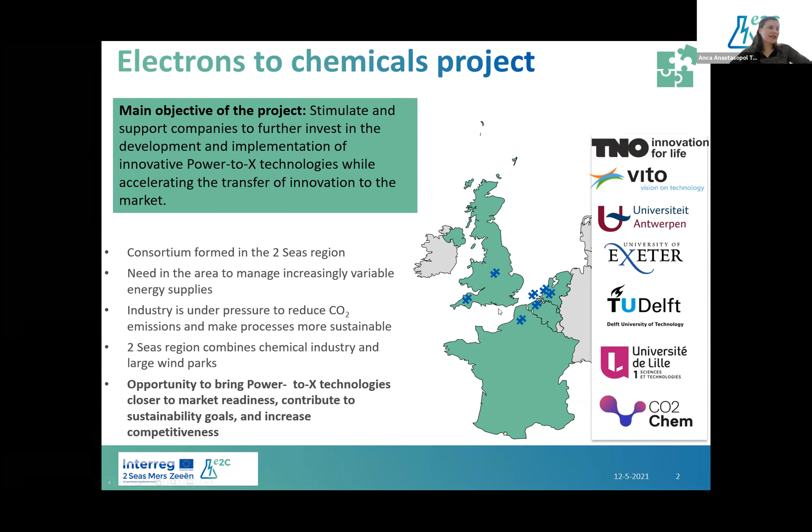Therefore, we have been working in the past few years on developing a lifetime testing station for novel electrolyzer concepts, highly flexible pilot installations for the direct conversion and utilization of carbon dioxide. We also developed flexible pilot installations which will be available after the project for cross-border testing and innovation.

For the synthesis of dimethyl ether via electrolysis and for carbon dioxide electrolysis to formic acid. Moreover, this link to the market is done in the project by looking at feasibility studies for the implementation of the technologies in the 2 Seas region.

And this will also be the focus of today's event. What are the findings from the project on one hand, and on the other hand, how are our guests and key speakers also looking at these issues from outside of the project.

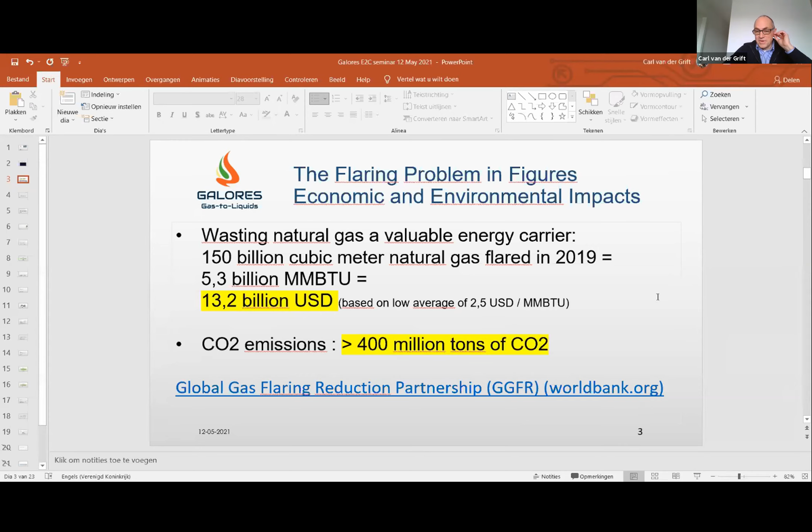And then you wonder, why is nothing being done about that? There are, of course, solutions, sort of. You could capture that carbon at the wellhead, because it comes available in a rather concentrated form. If you captured it and converted it into other products you could bring to market, you could generate additional revenues. Nevertheless, these solutions are not implemented to any significant extent so far.

We see that the barriers for implementation are that flaring, of course, is a known technology. It's well established, it's simple. The operators like it, it's cheap. Operators also consider that any small-scale carbon capture is complex, and they don't see the benefit of that. Furthermore, in some of these countries, they have rather weak environmental regulations and poor enforcement. So these things all contribute to a lack of implementation of any abatement technologies.

However, the times are changing. I think the world is certainly aware that we need to do something about CO2 emissions, and this is seen as a major source. The World Bank has started this Global Gas Flaring Reduction Partnership, where national governments sign up and commit to implement stricter legislation and monitor compliance. Oil and gas companies also commit to stop routine flaring by 2030. So the industry is moving away from flaring, but there's been little implementation so far.

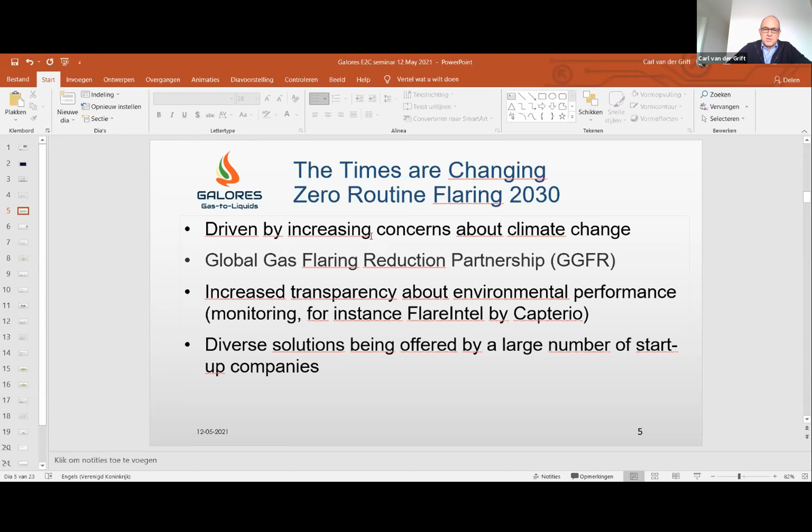So when Chi and I were looking for a challenge a couple of years ago, we decided this was a nice topic to look into, and we started Galores. Chi has a background as a chemical engineer from the University of Ghent in Belgium, and I'm a chemist from the University of Utrecht, and I've always worked in the catalyst business. So far we are just 2 people, but when we have a need for additional work, we will certainly hire additional engineers.

Galores' original idea was to go gas to liquids. In the 2 years we've existed, we've actually thought of 3 solutions we'd like to provide, but today I will mainly talk about gas to liquid. Here you take the flare gas, mainly interested in the methane, and convert the methane into synthetic crude, which can be transported to a refinery via existing oil infrastructure. Realizing that the operator of the well is interested in oil production, we thought we will make a product he's interested in, and we will stop the flare by doing gas to liquids.

Other solutions we look into are blue hydrogen production. Here you would take the flare gas, produce hydrogen via methane reforming and water gas shift, then separate the hydrogen for use as an energy carrier, and the CO2 you would re-inject into the well for enhanced oil recovery. So that is something we're working on.

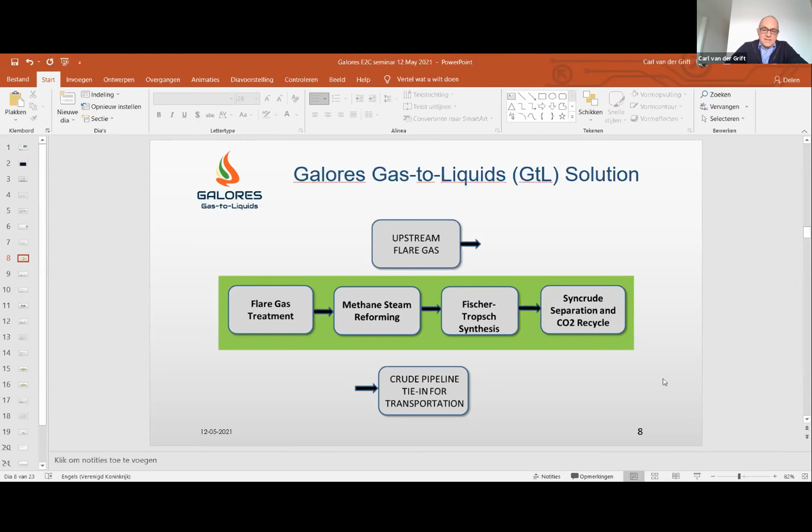Before we look into that, let's look into the chemistry. So here we have the methane reforming. Steam methane reforming is the conventional reforming, let's say, you produce CO plus 3 hydrogen. But recently in development is dry methane reforming, where you use CO2 as the oxidant, and you produce 2 CO plus 2 hydrogen molecules. Now you need to be careful because the catalyst needs some water to avoid coking, and therefore these processes are usually combined as a steam carbon dioxide reforming. More easily we talk about mixed reforming of methane.

The objective of this step is clearly to produce the syngas. Now side reactions are the water gas shift and the reverse water gas shift, as well as carbon deposition by either methane decomposition or the Boudouard reaction. Of course these last 2 reactions are certainly something you want to avoid because it will coke your catalyst and stop your process. So you need to be careful with temperature, pressure, and catalyst selection, and make sure there is enough steam to keep the process progressing.

Now, once you've got the syngas, you go to the Fischer-Tropsch, and there the CO and hydrogen react to usually long-chain hydrocarbons, saturated and unsaturated, plus some water. As you see, for every molecule of CO that you convert, you form one molecule of water. And there can also be some oxygenates being formed.

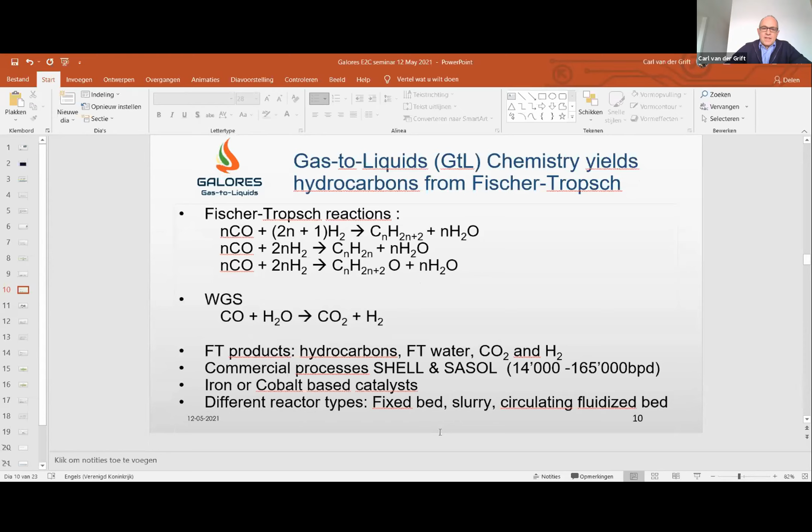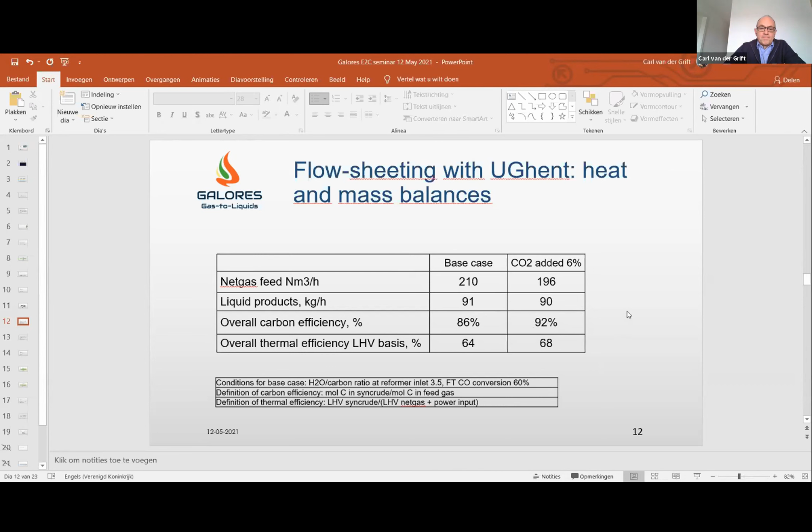So in summary, our technology is based on proven technologies for SMR and Fischer-Tropsch. We can use our own Fischer-Tropsch catalyst, but the process will also work perfectly fine with other Fischer-Tropsch processes. And for the SMR, we are already working with a third party. So the uniqueness is the CO2 recycled to the reformer where it can be reutilized. And we achieve carbon efficiencies in excess of 86%. We produce low sulfur synthetic crude.

And our idea now is to build these modular units off-site for a low fabrication cost, and then to bring them to the flare where they can be started up very easily, and they can be redeployed at other locations once the flare or the oil well is extinguished. We're looking for partners to do the basic engineering, because that still needs to be done, and to build a demo unit. And to make this basic engineering, we're actually looking for funding and launch customers. So that's where we are at the moment.

This is the Galores GTL. Then if we proceed to the challenges that we see, they are mainly economic. Unfortunately, if you do the business case for this gas to liquids, it doesn't really pay.

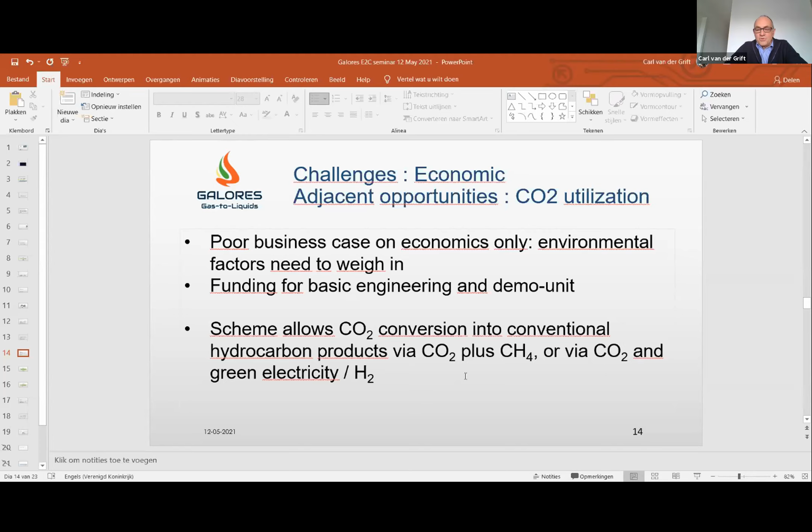The other thing which you can do, which might be more interesting for this audience, of course, is if you take captured CO2, you use green electricity, and you start with carbon monoxide production either through reverse water gas shift or from direct electrolysis of CO2 to CO. And you make hydrogen from the green electricity. Then you can produce syngas, you can send to the Fischer-Tropsch, produce liquid hydrocarbons for a tank, and the CO2 and the water which is formed in the Fischer-Tropsch can be recycled over the process, reusing green electricity to produce syngas, until extinction of the CO2, if that's what you want.

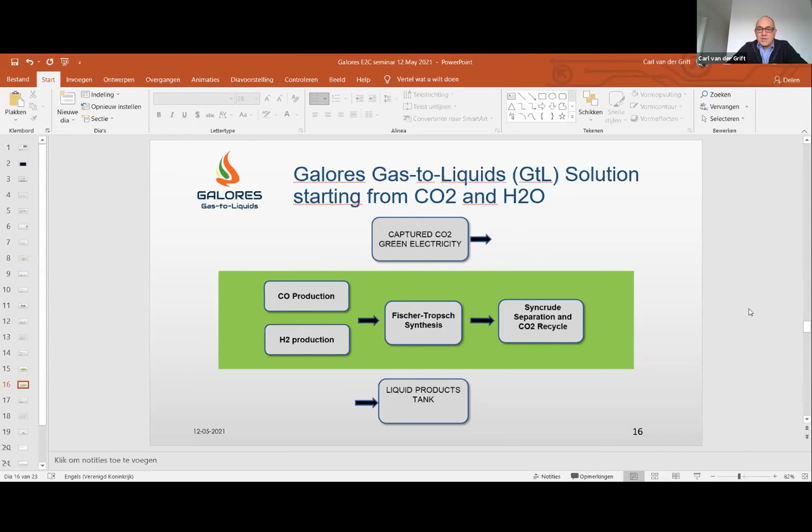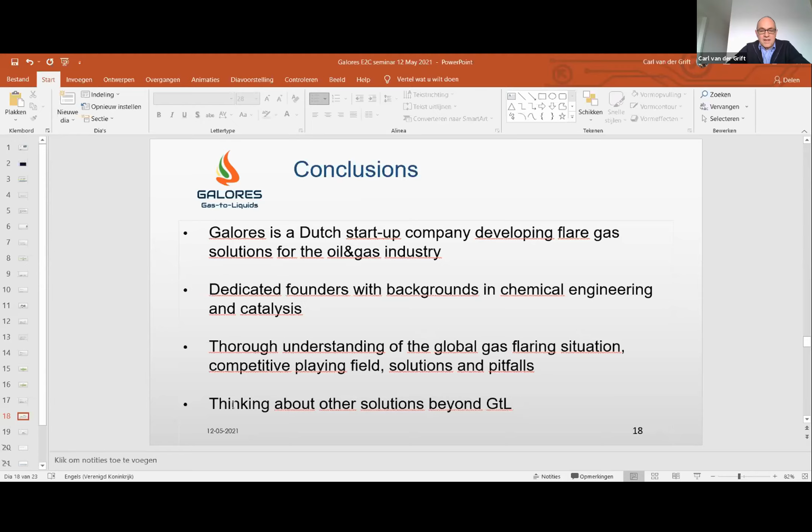So in conclusion, Galores is a Dutch startup company looking at flare gas solutions. We have dedicated founders with backgrounds in chemical engineering and catalysis. We have a good understanding of the global gas flaring situation. We know the competitive playing field and solutions and pitfalls. We have looked at all our competitors, as a matter of fact, and we see what is necessary to have a successful project. And we are thinking about solutions beyond GTL. So with that, I think I come to the final slide.

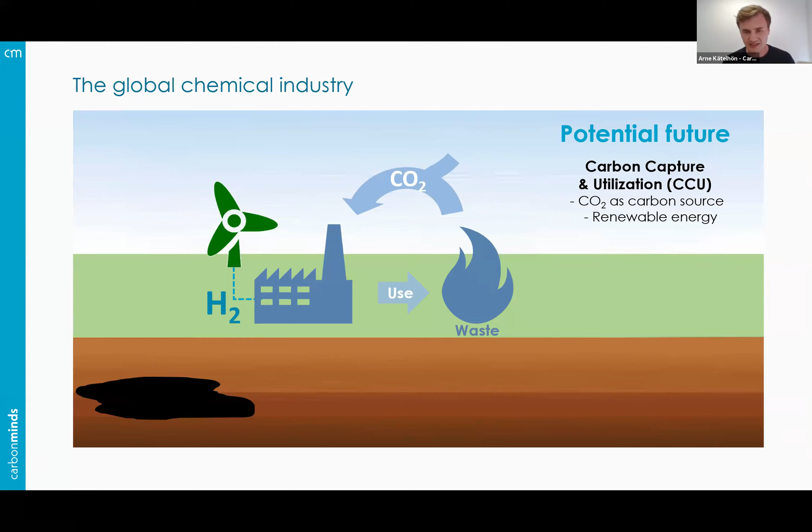For this scenario, we will look into the very concrete details on how this could look in practice. On the one hand, if we need an entire chemical industry which is based on CO2, there's a huge amount of CO2. Where could we get the CO2 from? Secondly, if we get the CO2, how would the chemical industry look if it were based on CO2 and hydrogen? And finally, how much emissions can we save, and what are the energy requirements? And this is also pretty much the agenda of the remaining 15 minutes. So let's start with the first question. Where can we get the CO2 from?

Those are the CO2 sources that we have in Europe, and only the large-scale sources. We have different types of power plants. We have pulp and paper, steel, iron, cement industry, and of course the petrochemical industry. Those are all large-scale CO2 emitters where we could capture CO2. And in addition, of course, there are direct air capture plants, so we could capture the CO2 also directly from air. This means we have quite a choice between our CO2 sources.

So the big question is, where should we get the CO2 from? And I would like to answer this question, first of all, from an environmental perspective. So what would be the most beneficial CO2 source if we want to reduce the climate impact as much as possible? And this brings us to a question: what is the carbon footprint of captured CO2 from the different sources?

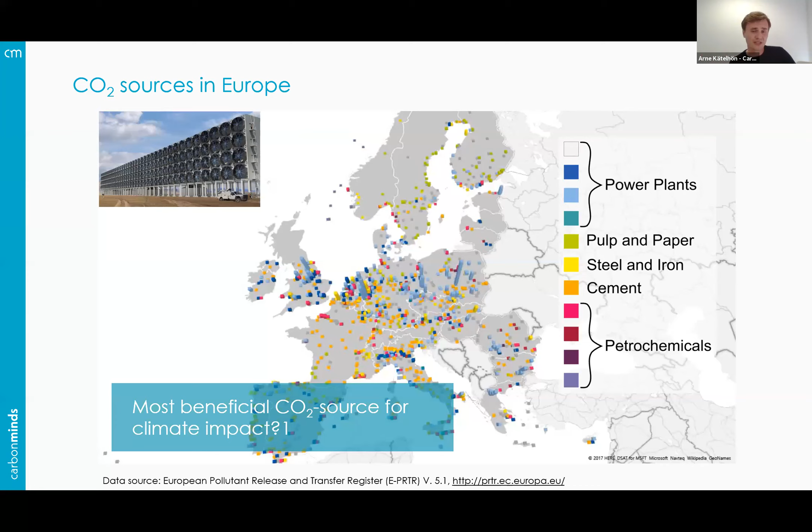And this caused a lot of confusion, I would say, in the CCU sector over the past year. So let's talk about this quickly. And to understand this, let us do a small thought experiment.

Let us imagine we could just draw a line between the natural environment and the man-made environment, so atmosphere versus technosphere. And now imagine I could just magically grab 1 kilogram of CO2 with my hand from the atmosphere, and I could just hold it in my hand. What would be the carbon footprint of this process?

It's quite simple. So if I grab it from the atmosphere, if I hold it in my hand, I've just reduced 1 kilogram of CO2 from the atmosphere. So the carbon footprint of this magic process in this case would be -1 kilogram CO2 per kilogram CO2 captured. And if I released it again to the environment, this would then be 0 over the life cycle.

The problem is we don't have magic processes. In reality, we need technical processes, so direct air capture in this case. And these technical processes, they always use energy and other inputs. And of course, the provision of this energy will again cause emissions, and also the other inputs.

So if we now assume a scenario where we take the electricity from the European grid and heat from natural gas, just as a scenario, it depends a lot on the energy sources, we would generate 0.46 kilogram through the provision of energy for capturing 1 kilogram of CO2. So this reduces the carbon footprint of the captured CO2 in this case to -0.54 kilogram CO2 equivalent that we save by capturing 1 kilogram CO2 and holding it in our hand.

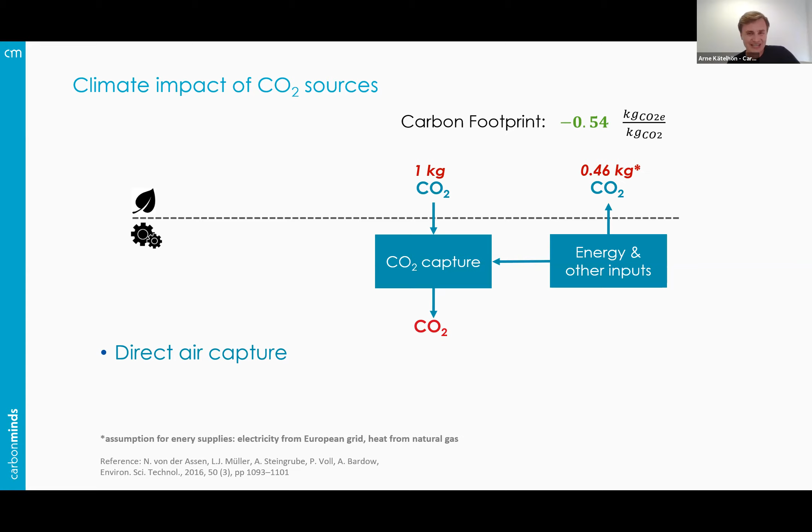But of course, we also have the industrial point sources, and they are already emitting CO2 today. So what we can do here is to go to the exhaust gas and take 1 kilogram of CO2 from there and put it into our CO2 capture plant. So this kilogram will be emitted less. And again, we need energy for capture.

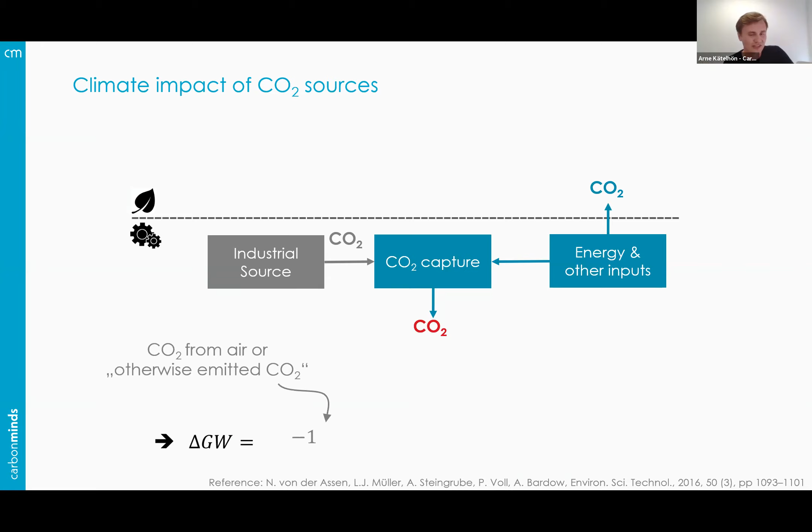So based on this simple thought experiment, we can already give the calculation guideline of how much emissions we save as a consequence of capturing 1 kilogram and holding it in our hand. It would be the -1, that will be emitted less, or that has been taken from the atmosphere. But of course, we need to account for the electricity demand and potentially transportation costs.

If you're interested in this paper, we discussed this in a more methodological, ISO-like language with authors from many different organizations in the EU and US recently. So I can recommend this paper for further details. But for now, let's just apply this to the sources that I just showed you.

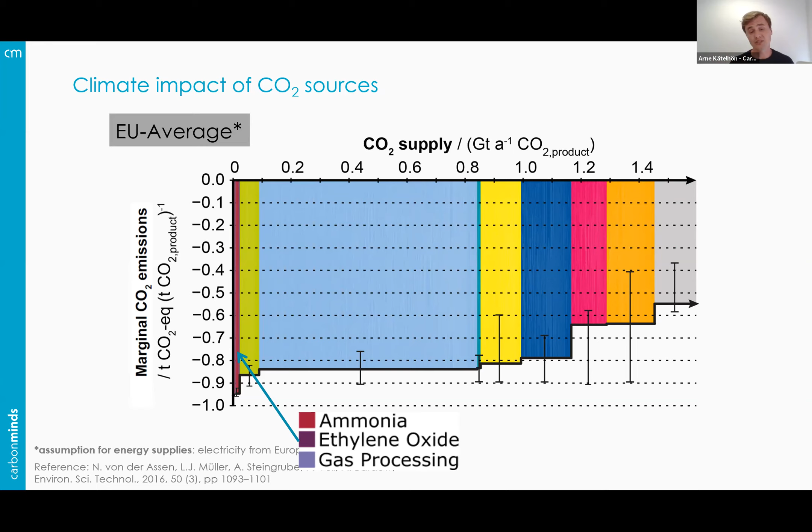We have the highest saving, for example, for ammonia and ethylene oxide, because they produce very highly concentrated CO2 in the exhaust gas. And the thermodynamics lovers among you know that, of course, the energy we need for capture correlates to the concentration. There are some lower concentrated sources: pulp and paper, coal, and also steel and iron, natural gas power plants, refinery and cement.

But of course, in some places, we might not have these large-scale sources available, and also in the future, we want to get rid of them. And this means we can still do direct air capture, which has the advantage that you can build it anywhere, and there doesn't need to be transportation in this case.

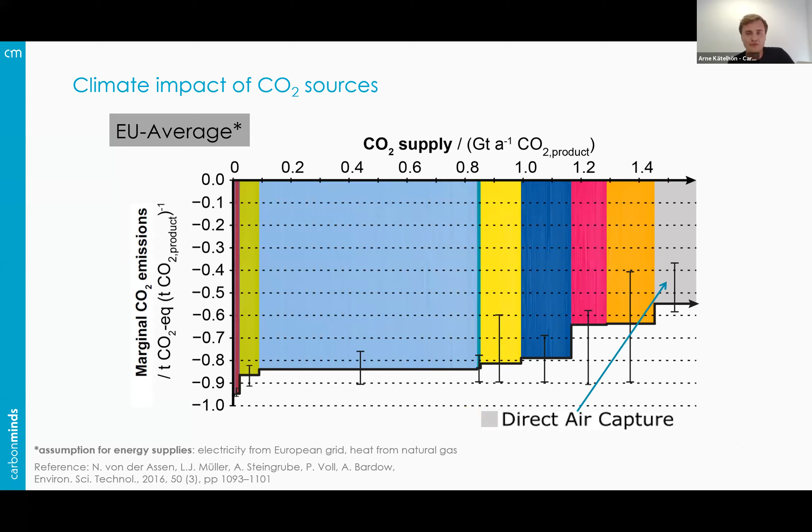What we did here, we calculated for the European average energy mix. If we do this for the country-specific energy mix in the different countries, the picture mixes up a little bit, but of course, qualitatively, we get the same results. So we can say, yeah, we save carbon footprint, and there's a lot of CO2 that we can capture, more than 1.4 gigatons here. Let's compare this to the amount of CO2 that is captured.

At the moment, of course, we don't capture that much, and we have a lot of sources. So right now, we can really choose from the different sources. This will change a bit. In the paper I showed you, we have scenarios for the future where we can still choose a lot, but we can say, yeah, there's definitely a huge choice right now. So why don't we just select the choices that lead to the lowest carbon footprint?

And what we can see, well, by capturing CO2 and having it in our processes, first of all, from cradle to gate, so to say, we have a negative carbon footprint at the point of capture. But does this mean that we just need to produce as many CO2-based products, as much in volume as we can to save the climate? The answer is, of course, no, because it's not only the capture that counts. We need to look into the entire life cycle of CO2-based products.

We put CO2 in from the beginning. And if you look into an ideal case where electricity has zero carbon footprint and so on, we will still burn the products in many, many cases at the end. So all the CO2 gets released. So even in this ideal case, we reach only carbon neutrality, ideally in brackets. And if we want to have carbon negative processes, this is of course also possible, but we need long-term sequestration. This can be done with some mineralization technologies or by carbon capture and storage at the waste incineration plant.

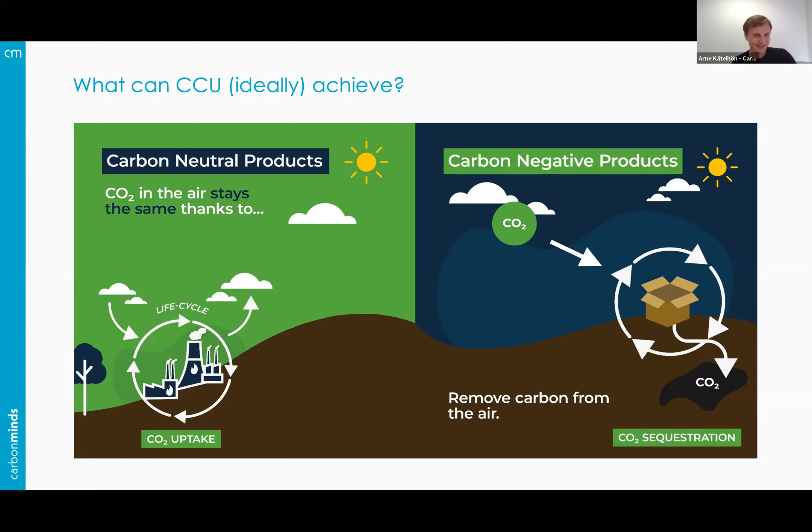So the most common case is not these ideal cases where we have zero carbon electricity. It's more today's case where we have still some carbon in the energy that is used. So in this case, the carbon footprint is not neutral. It's a bit higher than zero, but what we can say, well, in many cases, it's much lower compared to the fossil-based equivalent. So by replacing the current fossil-based processes, this is how we reduce carbon.

So for many, many CCU technologies, it's not that we put the CO2 in the product, because it was burned in the end. The emission reductions, they come from the substitution of something that is more polluting than our new processes. Yeah, and this is important. This is why I put some exclamation marks here.

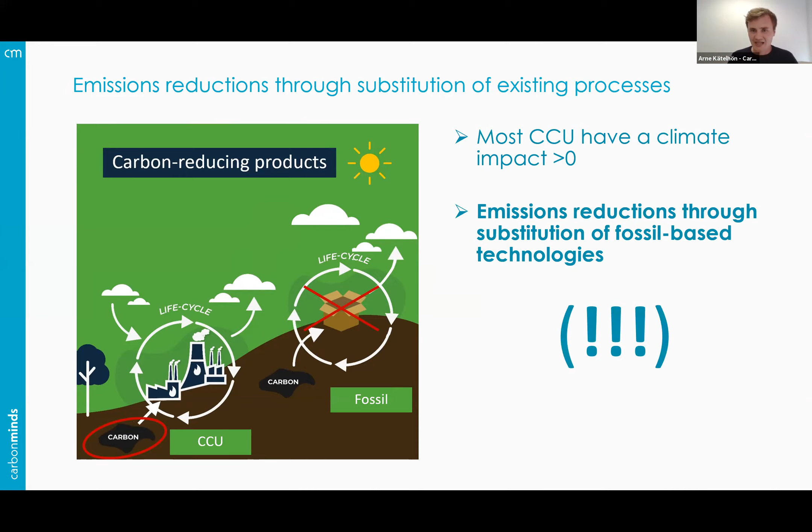So let's look into this potential substitution in the chemical industry. How would the industry look if it were entirely based on CO2 compared to the industry today? Today, the chemical industry is built in a tree-like structure. We have the fossil resources that are converted into feedstocks, which are used for the production of platform chemicals, like olefins, aromatics, which are again the platform for the production of all these thousands of different chemicals that we have today. What is important is it's a super interdependent production network. So plants use co-products from other plants.

We have energy integration. So if we want to analyze the mitigation potential of CO2 utilization, we can't just do LCAs, life cycle assessments, for individual products and sum up the results. No, we won't capture these interdependencies. We need a comprehensive model of the chemical industry that can catch all these interactions. And this is what we built in another study, which I would like to show you here. And we built it for this part of the chemical industry down here, for the production of large volume chemicals. And there's a list of the chemicals that we considered in the upper right corner.

What is interesting about these chemicals is that even though we have thousands of different chemicals produced in the chemical industry, only 20 large volume chemicals, the ones that we see here, account for about 75% of the cradle-to-gate emissions of the global chemical industry. So this is why we chose them as the scope of our assessment, and we compare the best available fossil ways to produce them with the corresponding CCU processes.

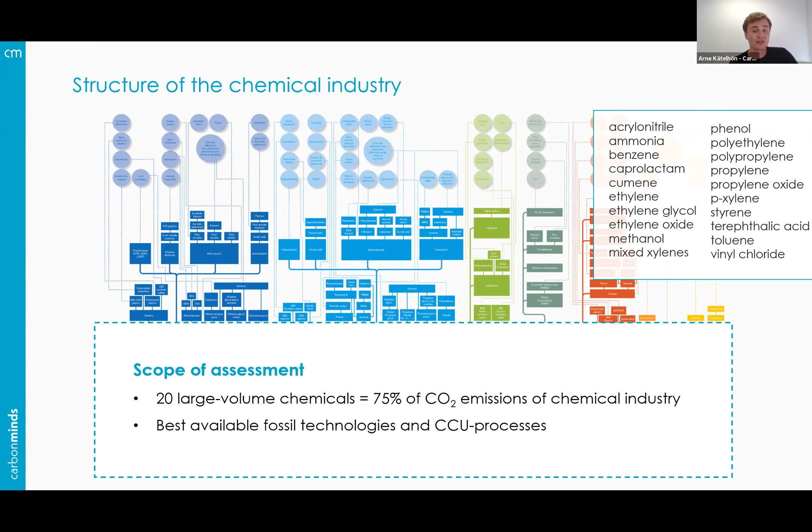We did this by first analyzing all the production pathways, and of course, for the 20 chemicals, we have many more production steps, about 160. In this case, we modeled process flow sheets for every single production step. We extracted mass and energy balances and the direct greenhouse gas emissions. And we used the data to build a full bottom-up model of the chemical industry. So basically a model where we can track physical flows from the oil to the product, in our case those 20 flows, and can also track the emissions.

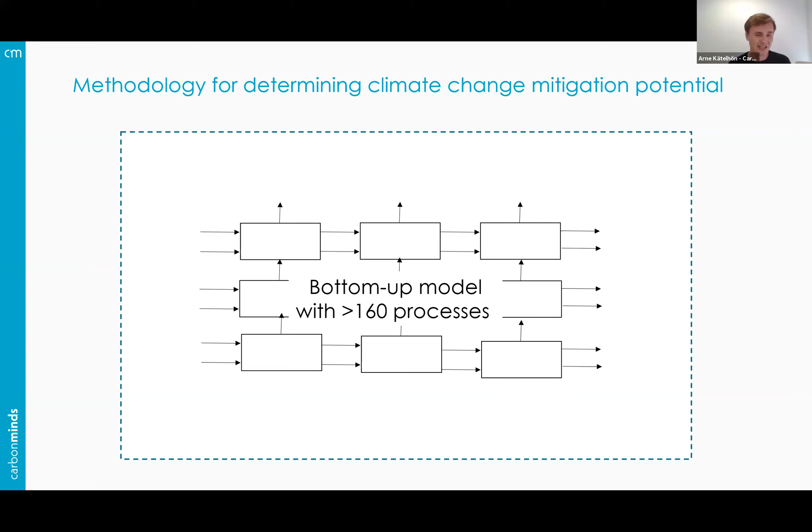The nice thing is, once you have such a model, you can start playing with it. And what we did, we transferred it into an optimization framework where we minimize the greenhouse gas emissions for the provision of the final demand of those 20 basic chemicals for the year 2030. Why minimizing emissions? Well, if we minimize the emissions based on CCU and compare it to the baseline scenario, we calculate the maximum potential of CCU. And this is what we did.

So let's look into the baseline scenario, the conventional scenario, first. So first of all, we put in the final demand in our model. We allowed the model to use only the resources that are already used today.

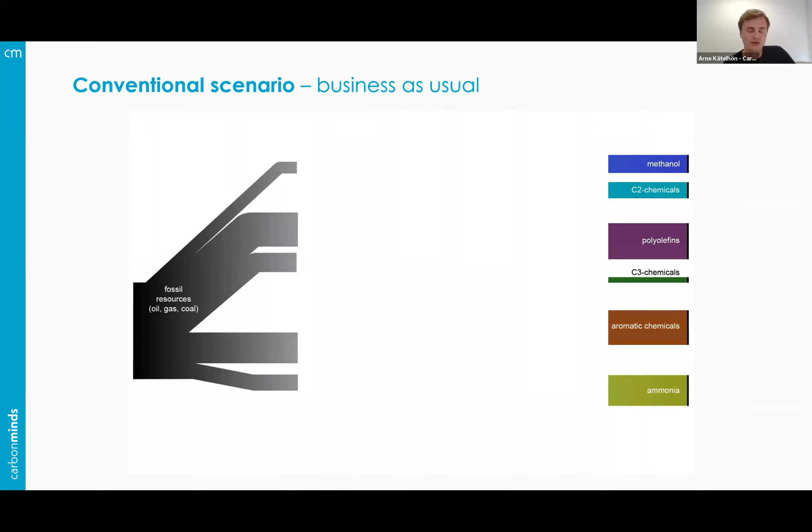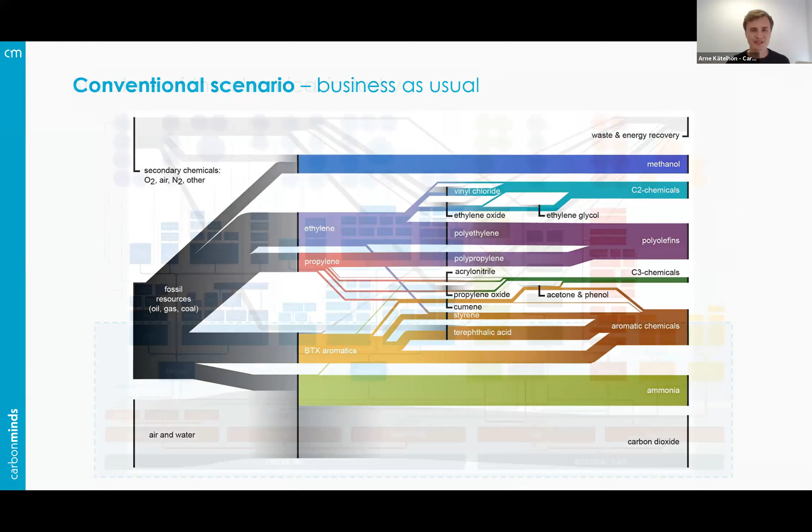We run the model and get, based on this optimization, our structure of the chemical industry. Fossil resources go into platform chemicals, which are the basis of all the other chemicals. What we see here is basically a more detailed representation of this part of the chemical industry.

The emissions are very similar if we compare to different standard studies. This was important because for us, it's of course just the validation step of our model. Now that we know the model works, we can go a step further and also allow the model to use CO2 and hydrogen from water electrolysis as feedstocks.

We do this in two scenarios. First, a high TRL scenario where we only allow CCU technologies that produce one of our 20 large volume chemicals with processes at a very high technology readiness level—in our case, almost mature, with pilot plants available. This was the case for methanol and methane. So we again put the final demand in our model, but this time we allow the model to use CO2 and hydrogen. We implemented the CO2-based production technologies for methanol and methane, and let the model run again.

What we obtained is a completely new structure of the chemical industry—a scenario of how the chemical industry could look if it were entirely based on CO2 and hydrogen. This picture has two messages, a good one and a bad one.

The bad one first: we see a lot of co-production of water for the production of methanol and methane, and also for the methanol-to-olefin processes which we need to get from methanol to the olefins and aromatics. Co-production of water means plant capacities need to get higher, so plants get bigger, more expensive, and it's an indicator of less efficiency.

But we can also see this part of the industry hasn't changed at all compared to the previous scenario, because we use CO2 and hydrogen to get to the olefins and aromatics, the platform chemicals. We know those are already today the platform to produce all the other chemicals. This is why everything in this part stays the same in this scenario, which would be important to keep the infrastructure and reduce investment costs needed.

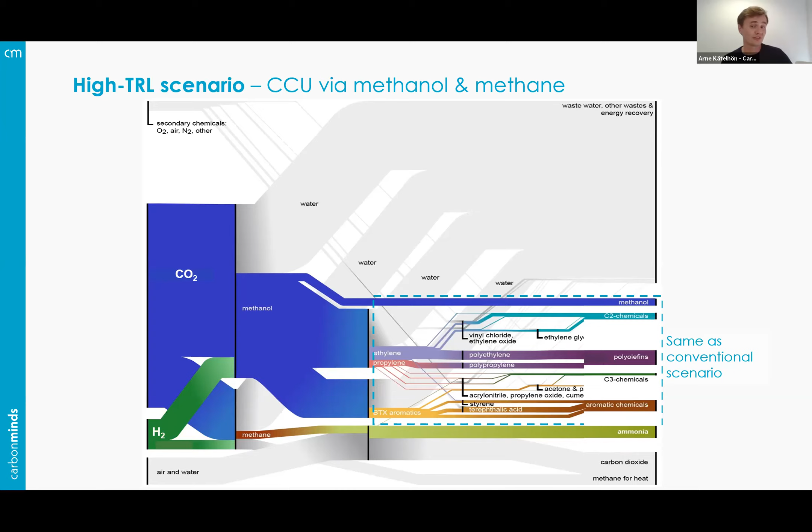But of course, CCU is a new discipline that's gotten a lot of attention over the last decade, and there are many technologies which are not at high TRLs, which are at early research and development stages. For our 20 chemicals, we included some more of those—direct routes from CO2 and hydrogen to ethylene, propylene, BTX, and some other chemicals.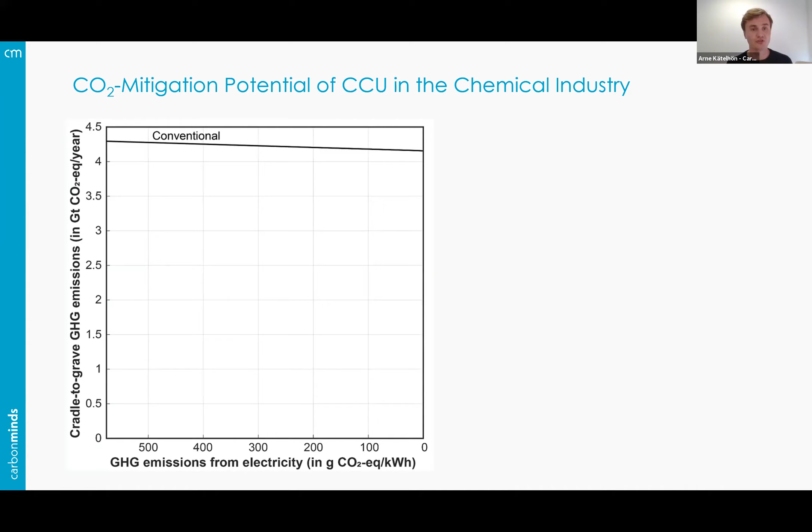This is the result for the conventional scenario: about 4.3 gigatons of CO2-equivalent emissions a year, about half of it through production, a bit higher than today because demand will increase, and the other half due to waste incineration of these chemicals at end of life.

And this is the result for the high TRL scenario. If we compare those, we can see there's a huge climate impact reduction potential—3.4 gigatons per year, getting close to zero for the entire industry. The remaining gap is partly due to, for example, non-CO2 emissions with a higher global warming potential.

If we look into the low TRL scenario, the impact reduction is even slightly higher. You see ranges for each scenario—this is because we have different CO2 sources, so it's the upper and lower range depending on what CO2 source you choose.

What is much more important here is what we can see: if we want to achieve these substantial reductions, we need extremely clean electricity. This electricity needs to be even cleaner compared to some of the very clean grid mixes that we have today, like Austria, Belgium, and Switzerland. You wouldn't have the huge reductions there. We really need renewable energy, like wind and solar PV, and we will need a lot of it.

So this seems to be difficult, at least from a first analysis. So how difficult is it? How much electricity would we need? To understand this, I brought a different graph.

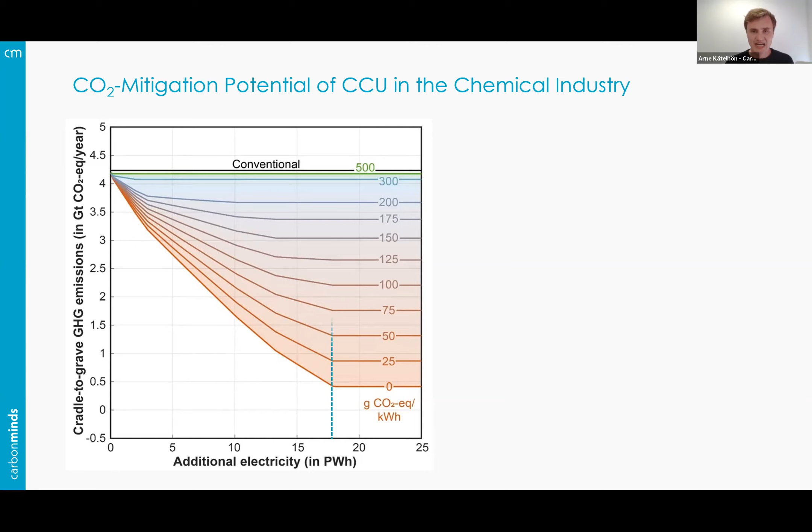To get back to the question, how much electricity would we need? In this scenario, we would need 18.1 petawatt hours. What does it mean? As a comparison, I brought the renewable energy target from the Sustainable Development scenario of the IEA for 2030. We can see this target is for all the sectors together. Only the chemical industry alone would need a bit more electricity than all the others together in this scenario.

I know there are some criticisms that the scenario is very conservative, but I think we can agree those are very huge amounts of renewable electricity. And if we go for only the high TRL scenario, it will be even more.

The good news is, we see there's a difference in slope here in the scenarios, meaning the greenhouse gas reductions per kilowatt hour of renewable energy differ. So if we don't go for the full implementation, we can at least use those technologies which mitigate climate change most efficiently based on the kilowatt hours needed.

But again, if we only go for 10%, 20%, 30% implementation, we're still talking about a very huge amount of electricity needed. So as a society, we need to decide if we want to use our precious and, most importantly, currently limited renewable energy for CCU in the chemical industry, or are there more efficient uses as long as we don't have enough renewable electricity?

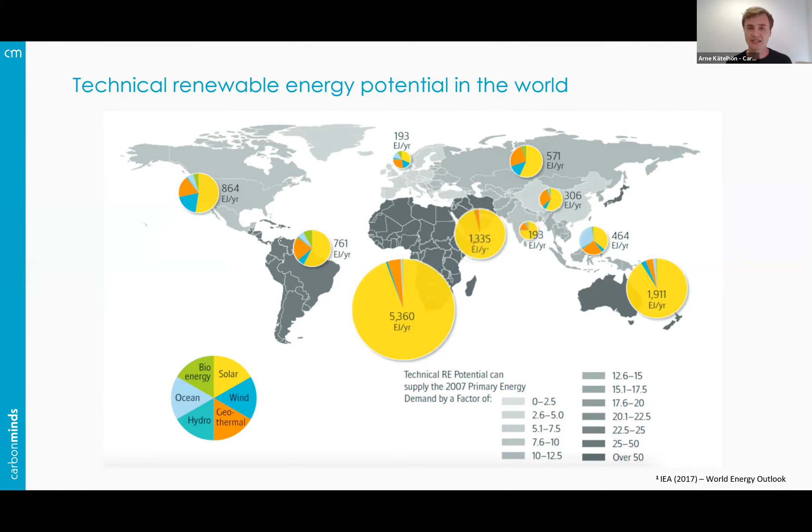So if we can make it possible to use this otherwise unused renewable energy, transform it into CO2-based energy vectors or chemicals, which can be further processed in the current industry locations right now, then we would enable a trade of renewable energy, a global trade via ships, and we could really use the huge potential of CCU in the chemical industry here. We are further investigating this scenario right now, and I believe this is something very interesting to look at.

So in terms of conclusions, we have seen CCU has a huge climate impact reduction potential, but it also requires quite a lot of electricity.

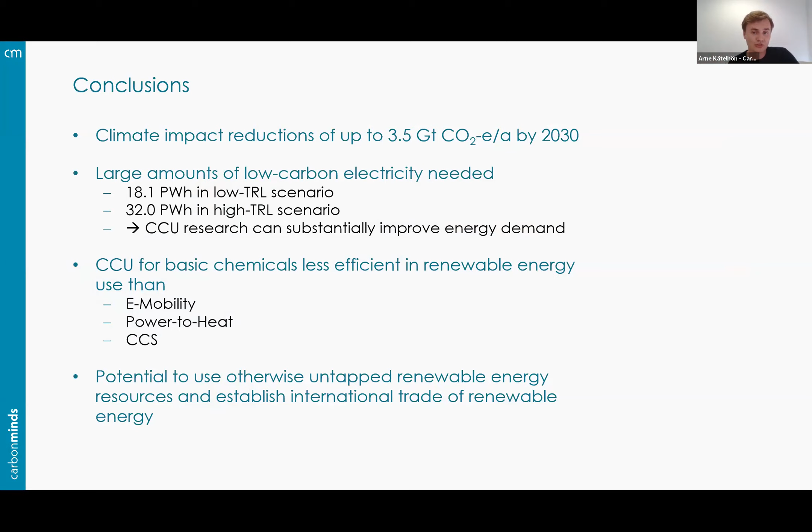When we implement it over the next years, as long as we don't have enough renewable electricity, we need to make sure that we use this renewable electricity most efficiently. CCU is less efficient compared to several power-to-heat and e-mobility applications. So a huge potential would be when these other options are satisfied and where these other options are not available. Here, CCU can really make a huge contribution to climate change mitigation. With this, I would like to thank you for your attention and look forward to the discussion session later.

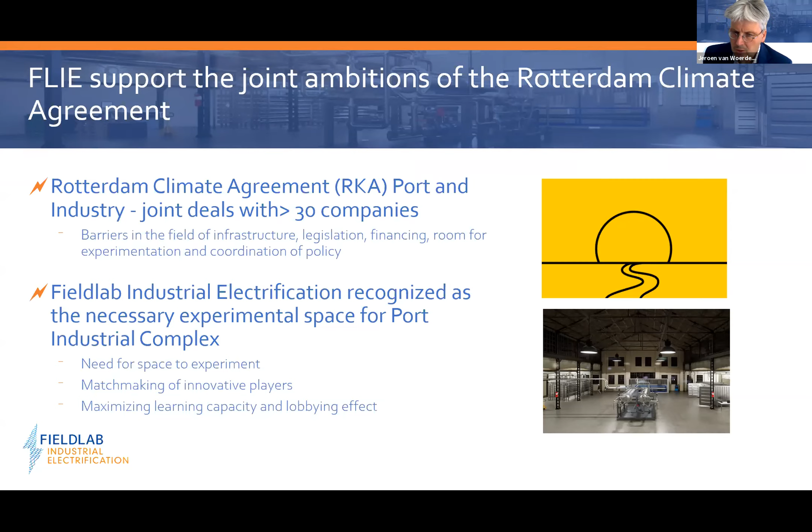With the field lab, we focus on the electrification. And this is our statement that we send around to everybody. We really want to unite players from around the world to bring them together to Rotterdam and to help this energy transition in Rotterdam. And for that reason, the Port of Rotterdam, Innovation Quarter, which is the development company of South Holland, TNO, Deltalinqs, the membership club of the Association of Industrial Companies in Rotterdam, as well as the FME, which is the Association of Manufacturers for High Tech in the Netherlands, supported by the government, European Union and local governments, decided to start this field lab.

And I will tell you in this story what we do with the field lab and how we support the industry, as well as support the technology providers. The key challenge that we have is we have a technology on lab scale with lower TRLs. It's well developed, the ideas are great, but at the same time, the industry is running. There is a very strong demand on this industry in continuation. There is a high pressure on cost control, but there is also a high pressure on safety control and management of change. And it's a huge step to make this step from pilot towards an industrial application while continuing the business.

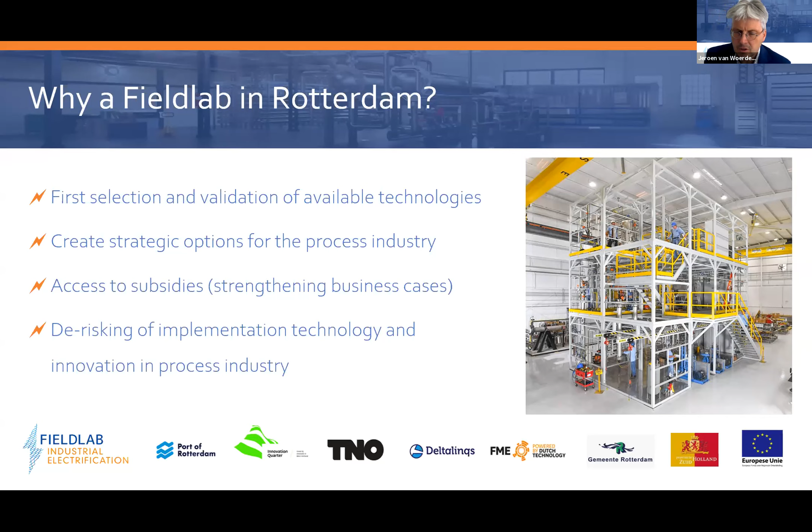And the last one I talked about, the risks. We have to de-risk the implementation of the technology. It's not that the companies are not brave, but there is an extremely limited acceptance from society of accidents in the industry. That means that there is a strict control of the industry, more than any other industry. We see that quite often when suppliers are coming. The suppliers are coming from the make industry, which has its own challenges, but on safety, they step into a new world if they go into the process industry. The process industry has a very strong demand of safety, and that means that everything that we implement has to go through a management of change process. And if it is a new innovation, sometimes that's not an easy step. And that's the reason why we also want to support those companies.

And this is what we really want to facilitate. On one hand, we have the equipment industry offering all kinds of solutions, new ideas, offering the different options. And there we have startups, small companies, and established technology firms. And we need all three of them. The new entrants offer very innovative solutions, but at the same time, not proven.

Established firms have a strong relation with the process industry, but at the same time, they also have to renew their business model. And at the same time, the process industry is the end user of the technology. The efficiency of the assets is extremely efficient, and in the process industry, price pressure from the market is huge. And it's the backbone of Rotterdam.

But there's another aspect which is important. I already talked about money and the financials, but regulations is also a very important thing. As we said, the process industry is a very heavily regulated industry. That means that regulations are in most cases built on history, and if you implement new technology, sometimes it really conflicts with existing regulations. I will give a few examples.

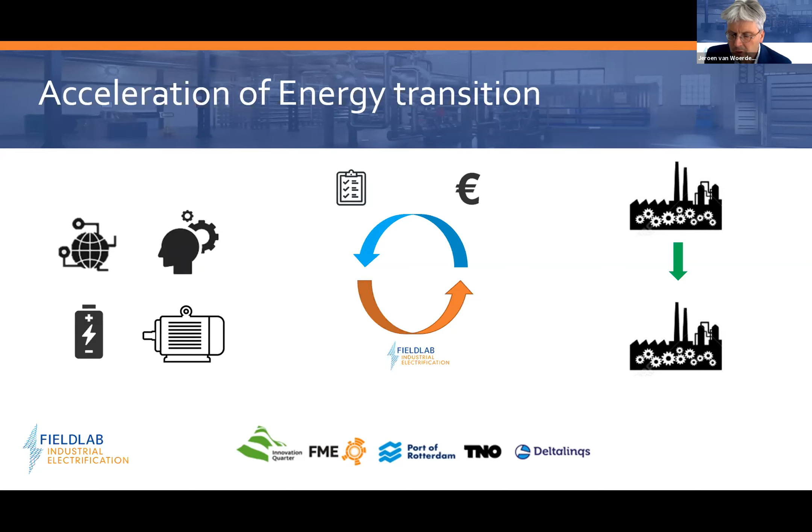TNO is very strong in developing technologies, and Deltalinqs, they represent the owners of the assets. And with that, we actually combined all the groups in this joint field lab that we set up.

In options, there are multiple options that we support at this moment. Based on the developments with green electrons, as I said, a lot of activities at this moment on the North Sea in supply of sustainable electricity. At the same time, also a huge shift going on in feedstock, and a lot of solutions coming up, not yet implemented, but in the next coming years, this will change dramatically fast with green molecules.

And we work together with the industry on the integration of those equipments. And with that, we have solutions for power to chemical, power to heat, and depending on the challenge that the industry has, we are working now on projects with them and try to speed up and accelerate their projects. How do we do that?

The field lab actually has three functions we are building, and the first one opened last January. We have a solution center where we give advice, and I will tell a little bit more in a minute, and we support the companies. And actually it's an administrative center where especially the know-how part and the financing part is a very important backbone.

At this moment, we are building one of the most important steps of the field lab. We are creating a pilot and test location. In this test location, and that could be one or two locations in Rotterdam, depending on the applications that we're gonna develop, we want to facilitate tests, experiments, and pilot projects in the TRL level 4 to 6.

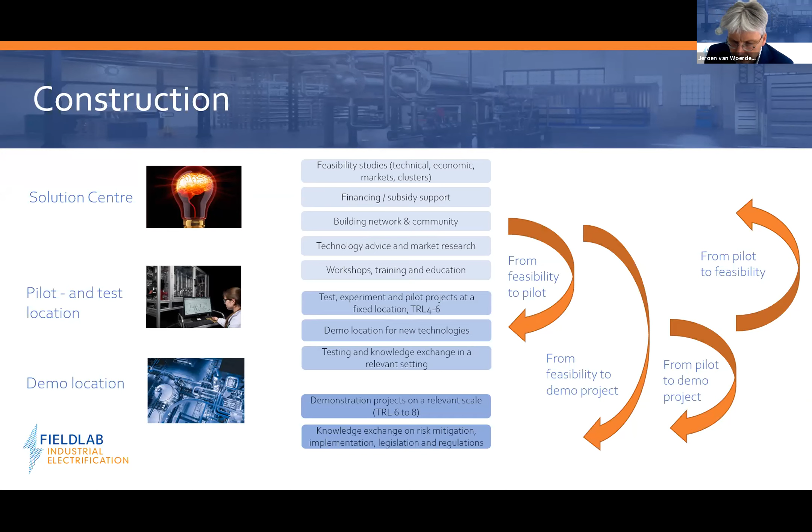The Solution Center has already started. That is now in the middle of Rotterdam. On a very nice location in the harbor, we have started a Solution Center close to the education institutes. And in the Solution Center, companies and suppliers of technologies can get support in know-how. We help them with feasibility studies. We do business case developments with them. And also the governments are asking feedback from us from studies, what they have to change to improve the conditions for this whole transition.

Especially together with TNO and FME, we also drive our innovation plans here, and we facilitate the cooperation with other technology institutes, and also here the exchange of information, but also building test cases for the future. And the next step that we will do is foster the collaboration between the companies, so that companies can quickly exchange know-how and learning aspects, and that they can get support for further research.

Timing-wise, as I said, the field lab started in the Solution Center at the beginning of this year. That was also the moment that the quartermaster phase was at the end. The central hub, we hope to open and announce in the second part of this year. And when I say hope, it is because we are extremely hardworking at this moment to make it possible. So the expectation is that it is at the end of 2021, but everybody knows that in the current COVID times, we have a lot of uncertainties to manage. So in one year's time from now, you can visit the central hub location. And the field lab demonstrations, we expect to have them from '23 onwards.

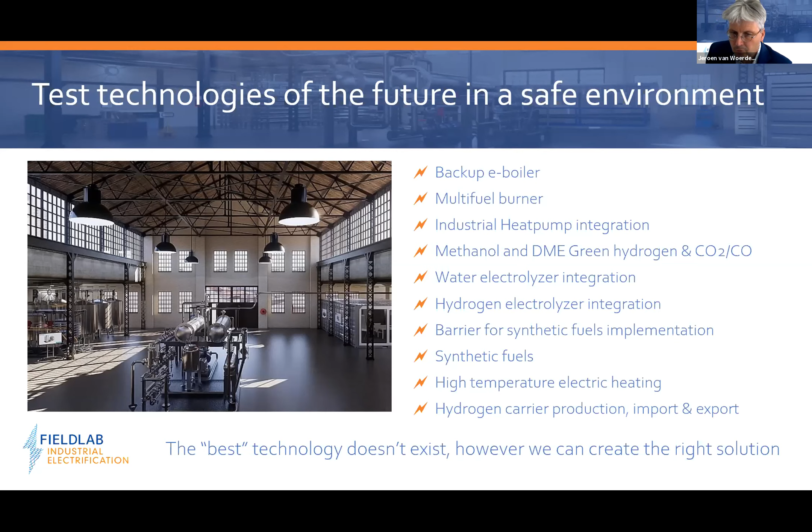Industrial heat pump integration. Now you can read all the examples that we have, but at this moment we are also discussing with a number of companies the implementation of synthetic fuel production and distribution.

In project development, we have a number of projects at this moment around power to heat, for example in preheating and e-boilers, but also power to chemicals; e-kerosenes and e-methanols are very important. And in concrete projects at this moment, we are doing, as I said, multi-fuel burners, one of the most important projects which we are running, and heat pump projects. And at the same time, on behalf of the government, we do a number of studies for carbon synfuels and hydrogen carriers so that the government can set the right conditions.

Why is it so important? You hear me not talking too much about technology because there are much better specialists, but implementing all those technologies, there's one thing very important. I know some people said it's a choice between environment and economy. We believe it's both. At the end of the day, we drive this whole industrial change because we want to have a strong economic force in Europe, which helps to develop society further, and of course in a clean way. So it's extremely important that we maintain the competitive position of the industry during the implementation.

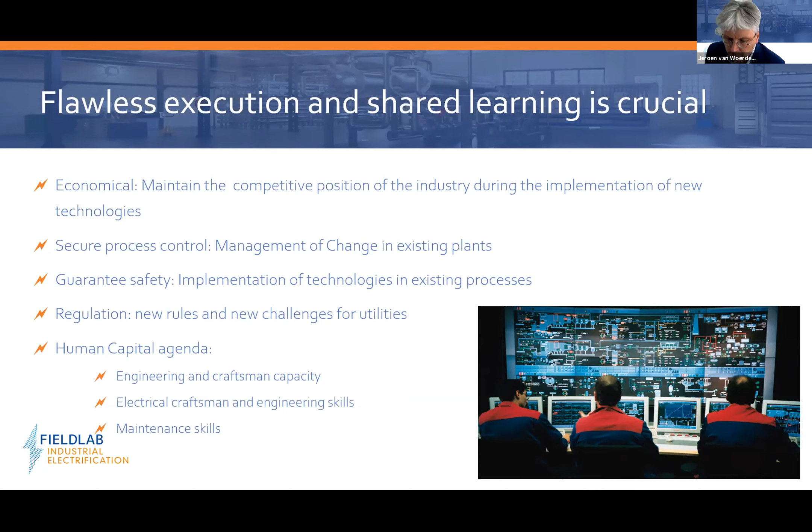Now, this is my last slide. Why do we do this? Cooperation is key. We all recognize the need for energy transition. It's recognized by the government and industrial players, but it's also recognized that it is a huge challenge. It's unsure, and it has a lot of unsolved technical solutions, but also economical questions. And we have to learn faster.

And with that, we have to share the unique know-how to support, and we have to create that learning environment, not only around people, but also around companies who quickly share. And that's more than a benchmark visit. That's really sharing the in-depth know-how, which for most process companies was in the past limited to their peer company in the same group of companies, where now we ask them really to share also with other companies.

Cooperation with different players and entities in the value chains, that helps. So that means that energy suppliers have an important role in that. And with that, and that is what we want to do, we want to secure and strengthen the competitiveness of the industry. So we want to have a cleaner industry that is more competitive in the future, and that in 2050 we have a CO2 neutral industry that is really leading in the world.

And with that, I think it's a clear example of connecting on one side technology and sectors, and in our case, the sector is the process industry. And I'm more than willing to answer the questions during the day.

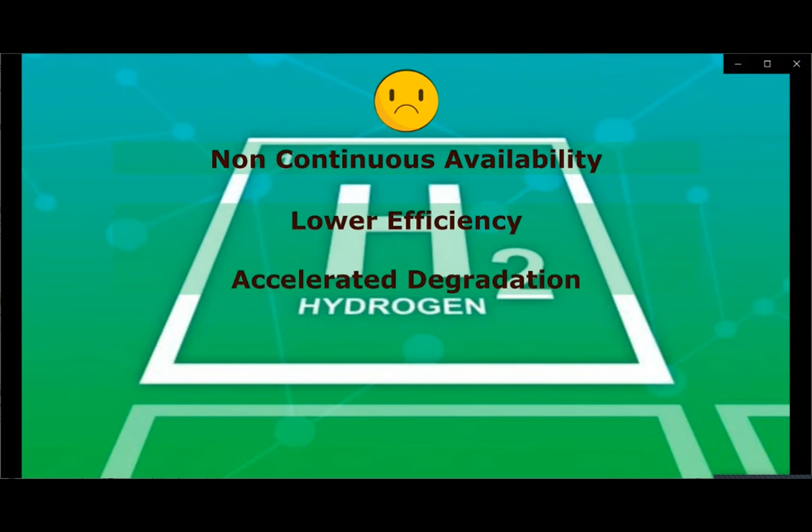Producing hydrogen using intermittent sources has its own challenges. The power is not available all the time, and the intermittent nature of the sources may lead to lower efficiencies and accelerated degradation of components. The whole system is highly complex due to the presence of multiphysics phenomena. Also, due to the involvement of hydrogen gas, the safety of the system as well as the operator is of prime importance. There is a requirement for solutions to make these systems more efficient and safer to use. Mathematical modeling could be the answer to these challenges.

A mathematical model is a set of differential equations that allows us to see the evolution of outputs based on the inputs and process parameters. A mathematical model of such a complex system can be used for studying the real behavior of components, subsystems, and overall system behavior under dynamic intermittent operations in various operating conditions. A good model can not only be used for process simulations but also helps develop control and diagnosis algorithms to run the system smoothly, safely and efficiently. The model can also be used for system health management.

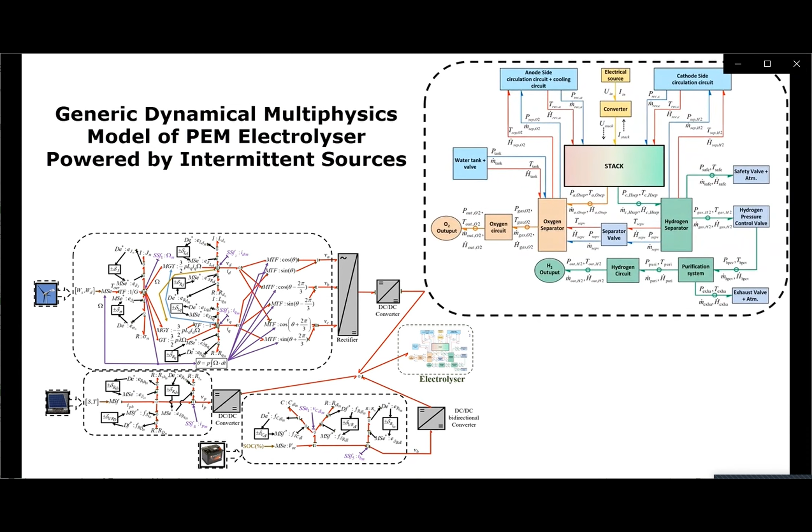Here at University of Lille, a generic dynamical multiphysics model of a PEM electrolyzer running on intermittent sources has been developed using a bond graph approach. The developed model has various key features. It consists of submodels, known as capsules, that can be easily modified to fit any configuration of PEM electrolyzer. Because of its generic nature, it can be easily sized and scaled as per requirement. The model incorporates calculation of efficiency at the subcomponent level to estimate the performance of the electrolyzer. Also, system dynamics and different thermal losses can be predicted, which cannot be done in the real process. The model can also be used for development of control algorithms and diagnosis algorithms for online implementation.

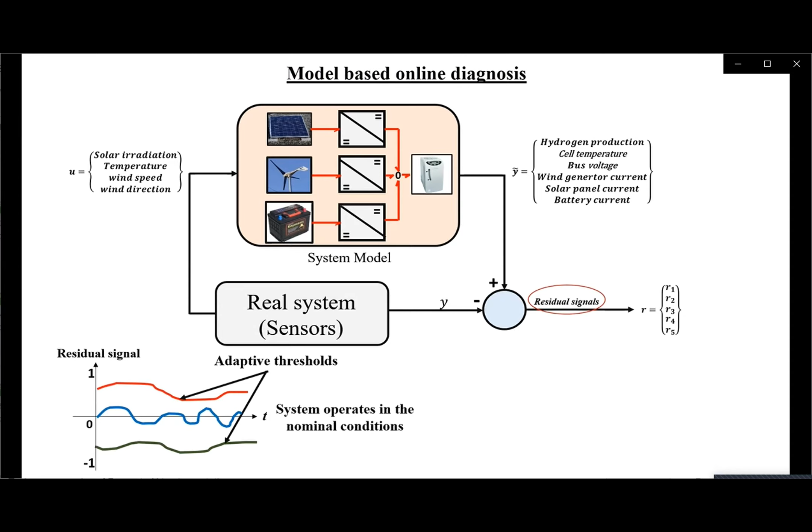For online fault detection, the estimated outputs of the model are compared with actual values from the real process measured using sensors. The difference between the two is known as the residual, and its value is zero in the absence of uncertainties. A non-zero value of the residual indicates the occurrence of a fault in the system. However, in actual practice, the residual value is usually non-zero due to the presence of uncertainties such as parameter uncertainties and measurement uncertainties. Therefore, to avoid false detection, upper and lower bounds for the residuals are used, known as thresholds. In normal operating conditions, the residuals do not cross the thresholds. When a fault occurs in the system, the respective residual value crosses the threshold limit and an alarm is generated. Not all residuals are sensitive to the fault that occurred. Therefore, by knowing which residuals have crossed the thresholds, the fault can be isolated.

Various subsystem-level efficiencies can be calculated in real time using the developed model. As the model is based on power exchange between different elements, one only needs to know the input power. The power at the input and output of every subsystem is known. Efficiency is calculated as the ratio of output power to input power, where output power is the difference between input power and the estimated power loss. With the help of real-time efficiency calculation, the system inputs and parameters can be adjusted to improve the performance of the system.

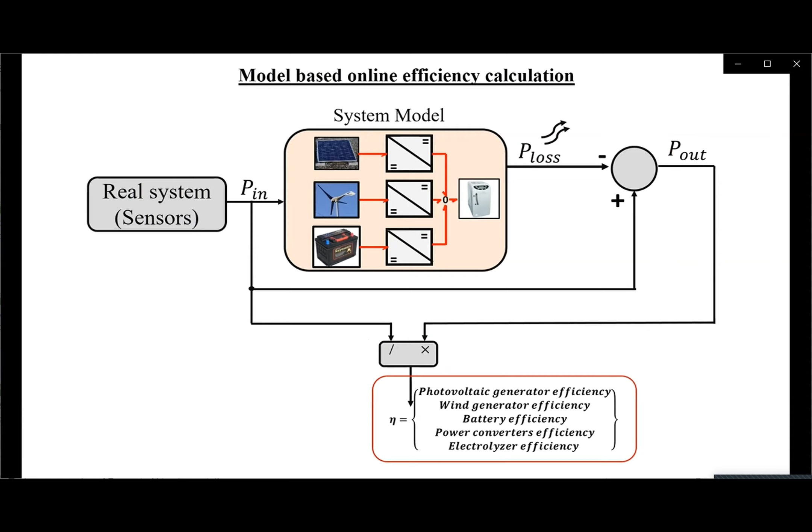The hybrid multi-source hydrogen generation platform, available at Polytech Lille, has been used to demonstrate the effectiveness of the developed model in online efficiency calculation and diagnosis for fault detection and isolation.

The platform consists of photovoltaic panels, wind turbine, and batteries interconnected to the common DC bus presented by the electrical cabinet. This electrical cabinet contains the power converters which are used to control the power flow, and the controller used for supervision. The electrolyzer uses the power produced by the photovoltaic panel and wind turbine to produce hydrogen gas, which is stored in the metal hydride canisters.

The produced hydrogen can be used for several applications, such as for producing DME using the said MES process or supplying the fuel cell to generate electricity.

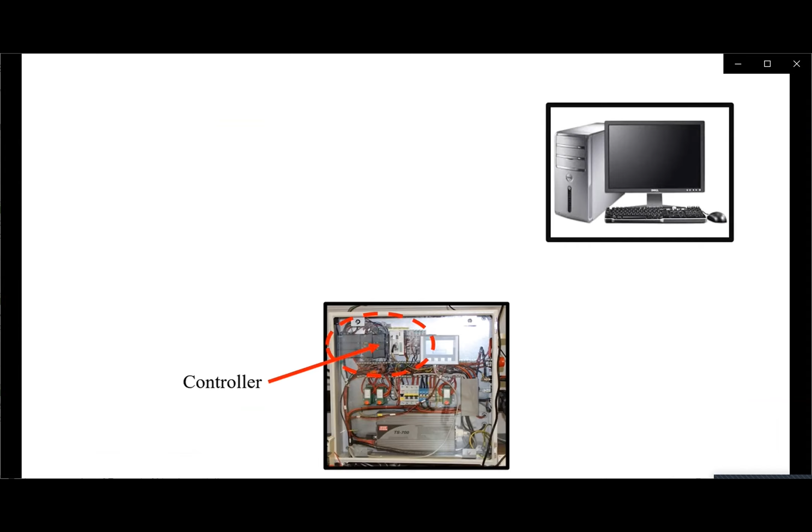For the implementation of the developed algorithms, data acquisition is required, which is performed using a controller and a Windows-based computer system. There is local communication between the two, realized to get the data of the sensor measurements and generate the control signals to act on the actuator to control the power flow between the HMS components.

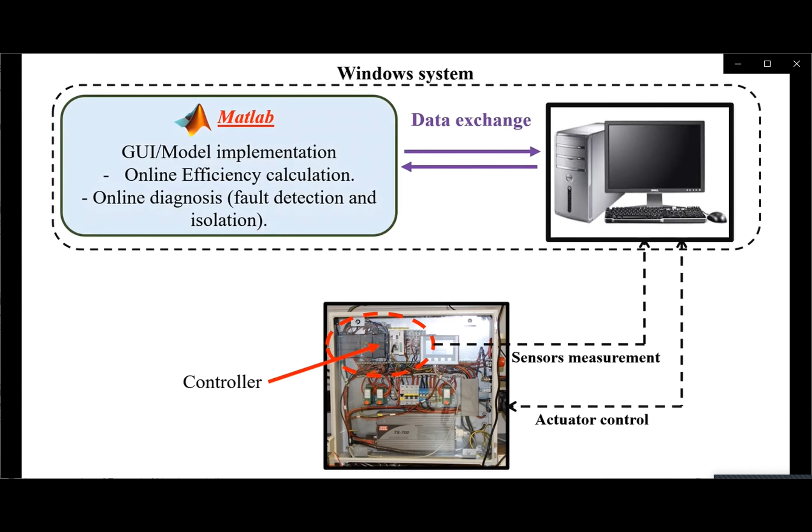A GUI has been developed using MATLAB Simulink in order to exploit the developed model for real-time efficiency calculation and for supervision of the platform by generating the fault indicators for fault detection and isolation.

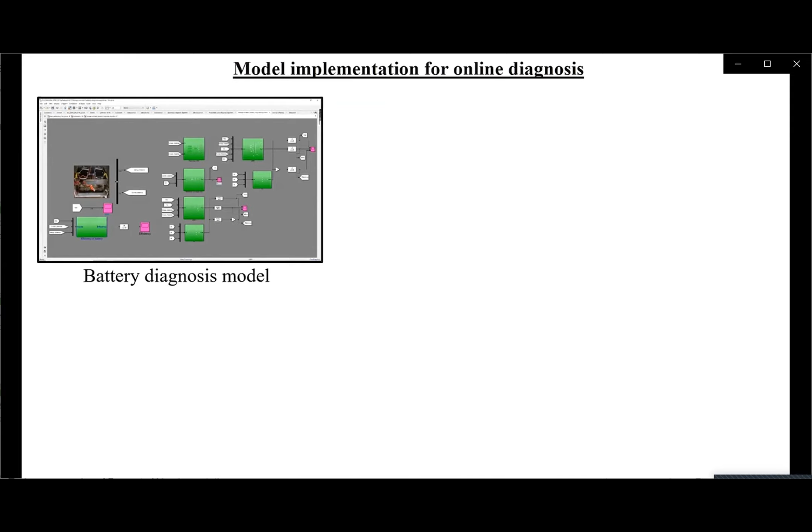Here is the GUI in operation in real time for platform supervision. Using this GUI, one can monitor the measurements of different sensors. One can also monitor the fault indicators in order to detect the occurrence of fault and monitor the efficiency of different components in real time.

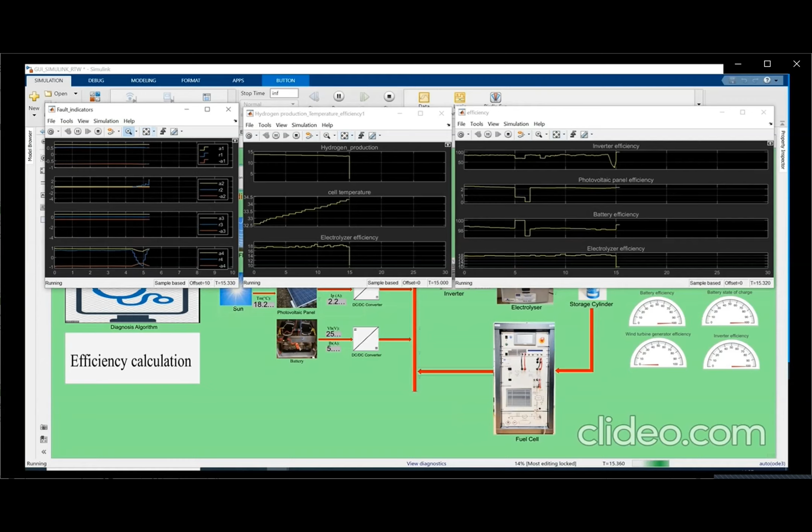The effect of the intermittency of sources on the efficiency of the electrolyzer can be seen. The intermittency of the sources does not allow a constant production of hydrogen.

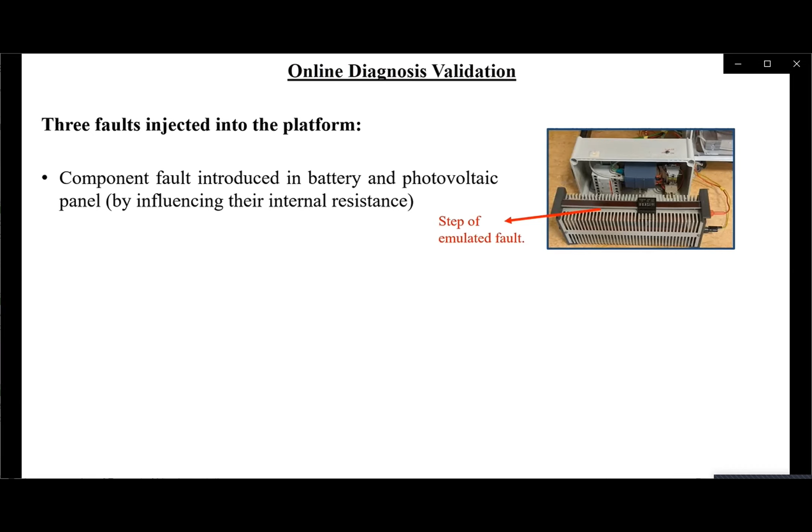For the validation of the effectiveness of the diagnosis algorithms, faults are injected into the platform and the evolution of the fault indicators with their adaptive thresholds are verified. 3 faults have been considered for the demonstration. 2 component faults are introduced by affecting the internal resistances of the battery and the photovoltaic panel. A valve blockage fault is introduced by shutting off the hydrogen flow valve at the output of the electrolyzer.

This demonstration corresponds to a component fault in the photovoltaic panel. To introduce this fault, we vary the resistance to push the internal resistance above the acceptable limits. On the right side we can see before the injection of the fault, the residuals are within thresholds. When the fault is injected, residuals 1 and 2 go out of the thresholds. This shows only these residuals are sensitive to this fault.

The fault is injected in the battery in a similar way as it is done for the photovoltaic panel. On the right side, we notice that only residuals 2 and 3 are sensitive to this fault, as they went out of the thresholds when the fault occurred.

The blockage fault is injected in the electrolyzer by closing the valve of the cylinder during operation of the platform. In this case only indicators 2 and 4 are sensitive to this fault, as they went outside the thresholds when the fault occurred.

According to these demonstrations, it can be seen that each residual is not sensitive to all the faults. For example, the fault on the panel influences only residuals 1 and 2. The fault on the battery influences only residuals 2 and 3. The blockage fault in the valve influences residuals 2 and 4. According to this analysis of the fault signature matrix, we can conclude that the faults can be isolated when they occur.

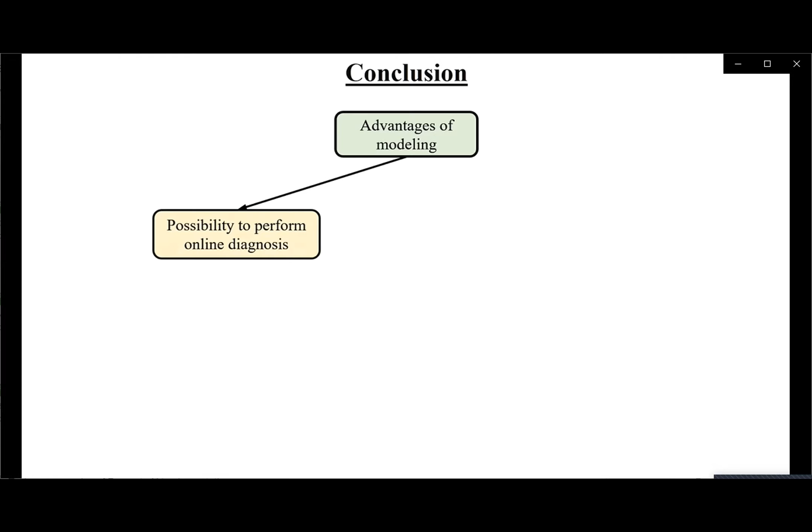From these demonstrations, we can conclude that modeling is very important for engineering tasks. The developed model can be effectively utilized for fault detection and isolation. This allows us to select a cost-effective maintenance strategy and we can reconfigure the system easily in order to implement robust control.

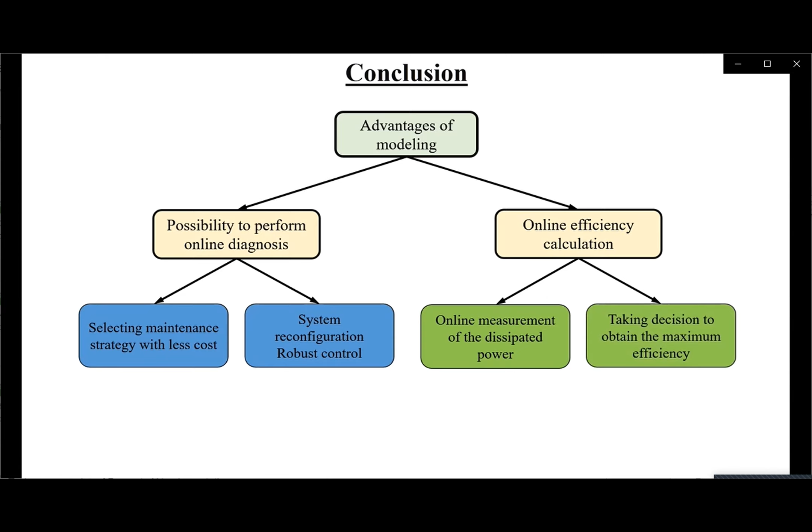The model is also effective in carrying out online calculation of efficiency, which allows us to estimate the dissipated power and take appropriate decisions for maximizing the performance of the system. These strategies will ensure the availability of the energy.

What we can offer: we can provide the dynamic model for the development of optimal operation mode management algorithms, and carry out the study to check system reliability. We can help with the implementation of online diagnosis and health management algorithms, to ensure the safe and efficient operation of the hybrid multi-source platform for green hydrogen production.

We can help reduce maintenance cost by selecting the best possible maintenance strategy for multi-source platform equipment, such as wind turbines, solar panels, electrolyzers and fuel cells. We can offer feasibility study and technical and economic calculation before the installation of green electricity production and storage facilities.

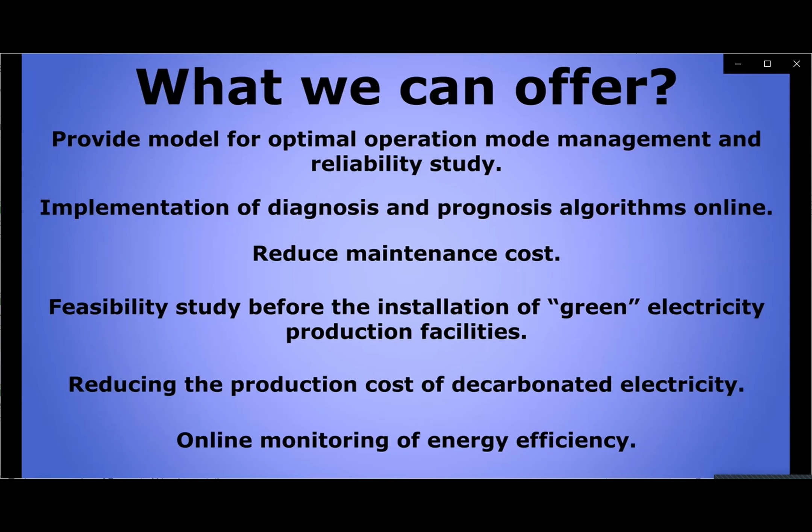With our expertise and set of skills, we can help in decreasing the production costs of decarbonated electricity. We can help in realizing the online monitoring of energy efficiency.

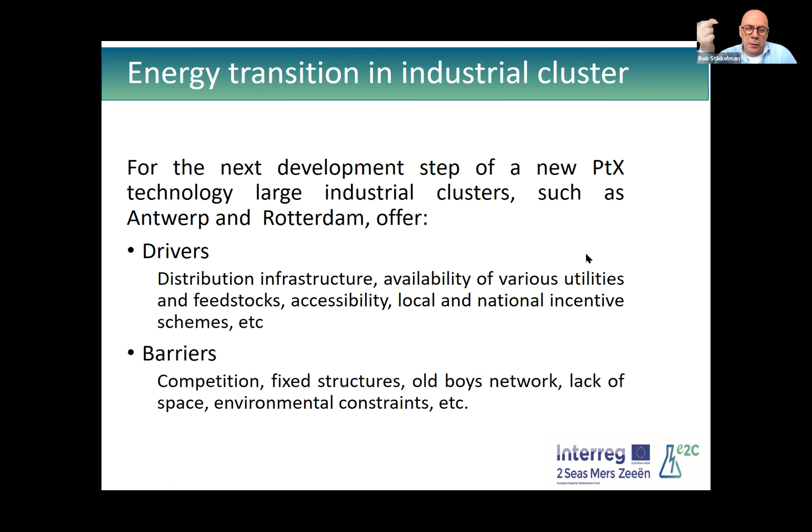So I'm interested in how I can include a Power-to-X option in such a cluster. Then I look at whether it's a good enough TRL level, and I see a business case analysis - often about CAPEX, OPEX, and world market prices. That's often necessary to do, but I think it's not enough, because we should also try to include all the effects of putting a new technology into a cluster.

The best summary I could give was this one: I see an existing industrial cluster, everything is running and doing quite well, and I have a very, very innovative new PTX option. But I really don't know what the effect will be when I have to include that one in the system. This is my problem.

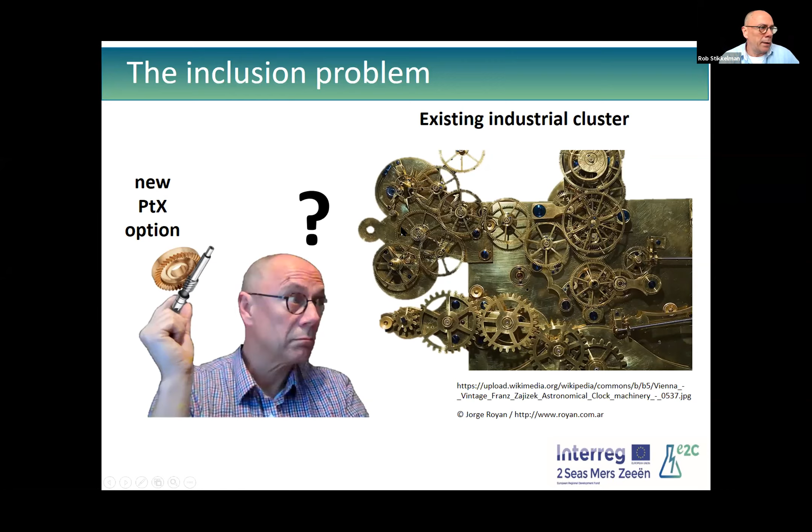Thinking about that, I made some discoveries. I have quite some experience in conceptual process design, making Aspen models, making difficult models with MATLAB and other programs. My conclusion is it's all too complex to do it that way. If you build an Aspen model for a new process, that's okay, but if you want to do it for a cluster, you will fail, just because of time - the problem is too complex, so you're not able to do it in time. So what were our choices?

We will model the cluster firstly as a network, not as an A-to-B process, but as a network, so there are recycle flows and so on. And we use processes and products - that is our distinction: we have processes and products.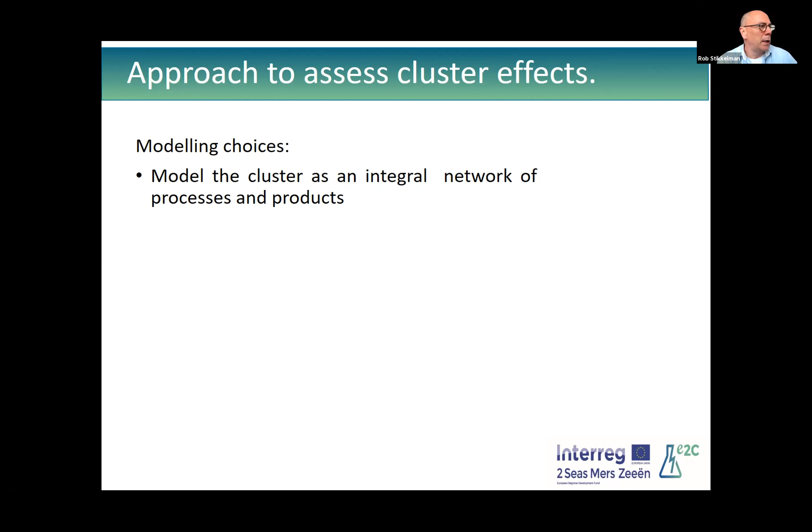And we will simplify. We will just simplify everything. Even sometimes maybe you will think it's too simple, but we want to have linear relations. If you are designing a process, yes, Aspen is very useful because you can just find the best process. At the very moment the process is running, it's basically doing the same for a long time. So then you can choose for linear relations. So this is our approach.

Yeah, we still include time series, so it's somehow dynamic. It's dynamic in one direction, as I call it. And we also include owners of processes. And now, the final trick we do, and this is basically, I think, the strong part of our approach, we use a program called Linny-R, which is a graphical user interface that makes it very, very easy to build mixed integer linear models. You just place processes and products on a sheet, and the model is there. So you don't have to really bother about the model.

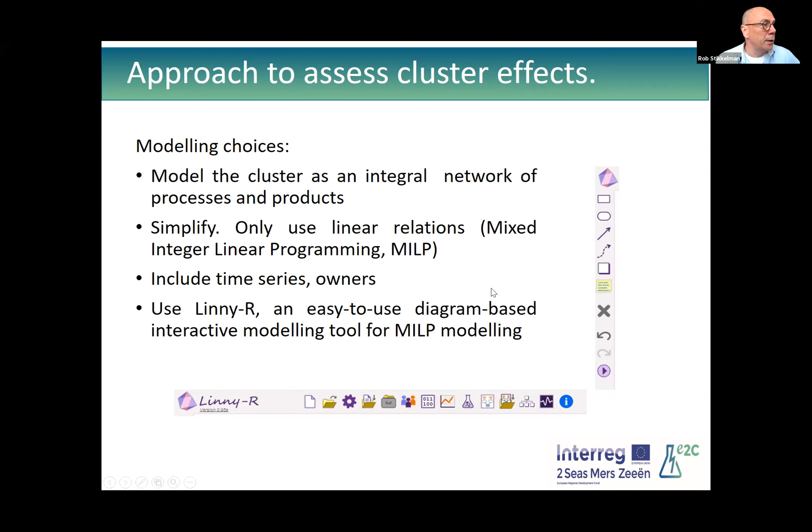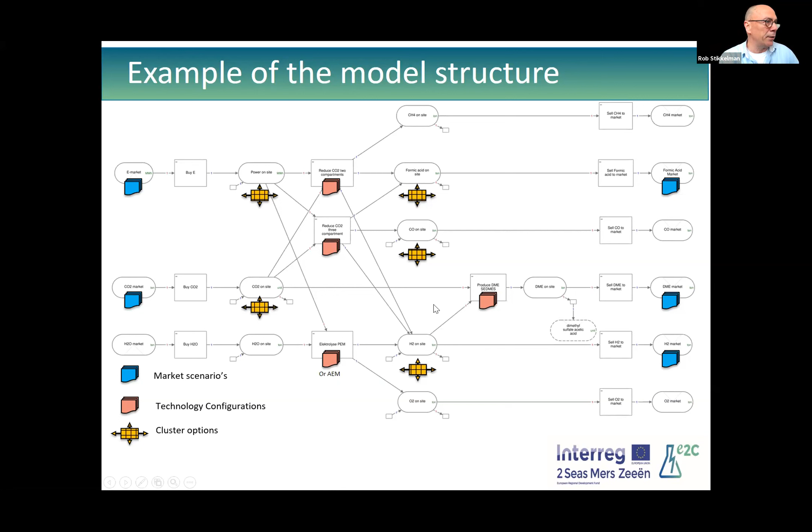This is a little bit how we create what I call a mixed integer linear programming model, only with linear relations. What did we do so far? We chose the clusters of Rotterdam and Antwerp as our cases, and we already partly modeled those clusters. We have a baseline for markets, and we have, of course, models for the PTX options from the project. And now I'm busy implementing the Porthos and the HyTransPort projects in the system.

And now I show a lot of model deliverables. I will not name them all, but basically we are able to show all kinds of products and financial flows in the model. This is a little bit what I have to tell in this story. If you want to hear more, then you are welcome in the breakout session.

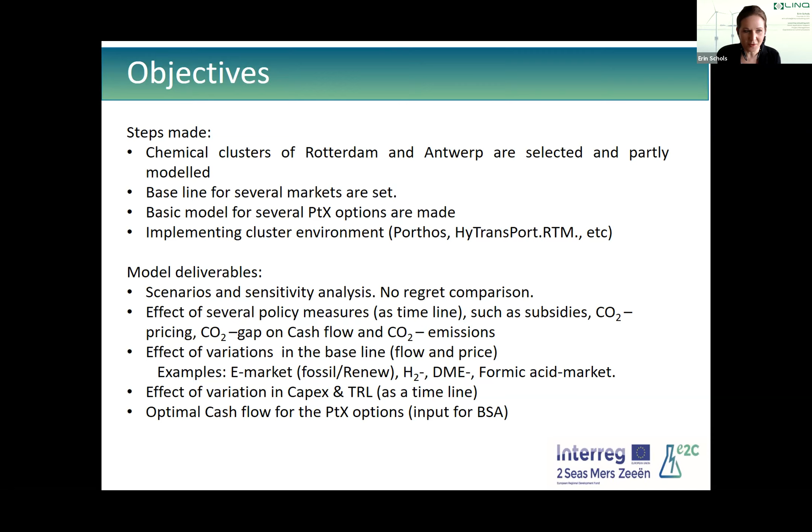Peter, are you there to go ahead and share your screen? We do not see you or hear you, Peter. There, how about that? Yes, perfect, thank you. Go ahead. Right, I'll just make it on the slideshow and then I'll be with you. Sorry. No worries. I think it's sharing, but it doesn't seem to be going to the slideshow. Oh, there we go.

Right, I'm going to give an introduction to what we're doing to carbon footprint the Power to X DME process. So as part of the E2C project, there wasn't actually a deliverable designed to do a full LCA. So we realized that that was missing in the project. So what we've done is got a master's engineering student to do his research project, working out the carbon footprint of the DME process and the formic acid process.

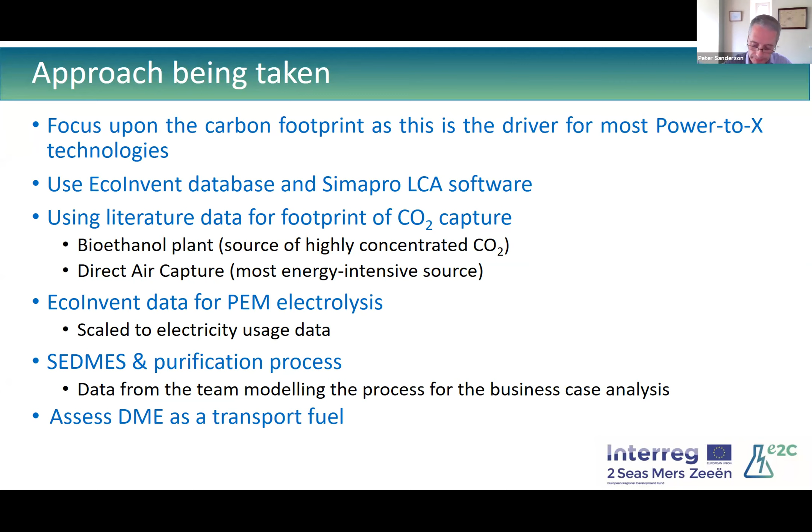Now, as soon as you start doing an LCA or a carbon footprinting process, you start realizing that there's so many assumptions that have to be made. So for instance, we're assuming that the CO2 captured from a bioethanol plant is minus 0.94 kilograms. So the footprint of the carbon dioxide is almost -1. And Arne very kindly mentioned in his talk that in an ideal world, if you're capturing 1 kilogram of carbon dioxide, its footprint would be -1 because you're removing it. Obviously, the footprint never is -1.

From a bioethanol plant, the concentration of the CO2 is something like 97% pure. So there's very little extra processing you need to do. Therefore, the footprint when you're capturing it from such a place is very low. However, using direct air capture, the footprint is significantly larger. Both of those footprints, of course, depend on the carbon intensity of the electricity you use to capture it. So that adds an extra complication, but I'll explain later on how we can get around that. We don't worry too much about that.

We've looked at the electricity from 6 different sources. We looked at the electricity sourced from the 4 E2C nations. So that's the UK, the Netherlands, France, and Belgium. And also electricity sourced from offshore wind and solar PV.

And another assumption which is worth mentioning is that in reality, the process isn't 100% efficient. So some CO2 and some hydrogen is actually left over in the reaction vessel. So we're assuming that is recycled back into the reaction vessel, as well as the carbon monoxide which is formed, that's recycled back. However, when you're doing an LCA, you have to decide what you do with all these other residual compounds. And there is a small proportion of methanol which is produced.

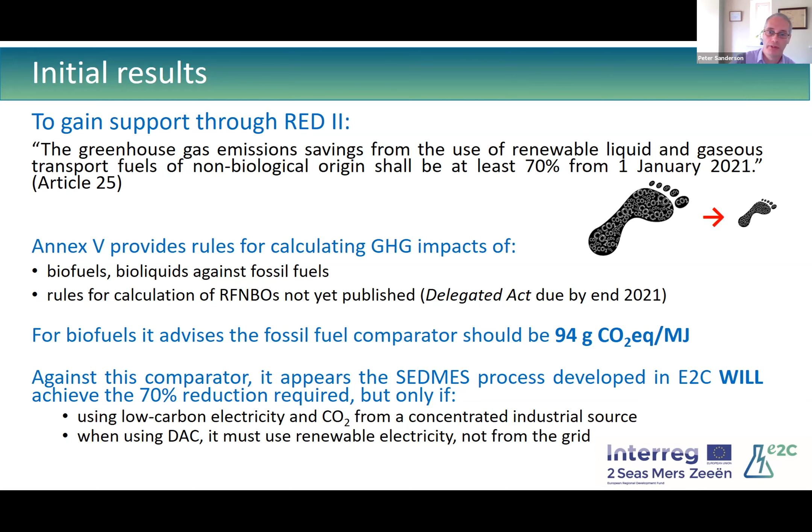Also, you need to use carbon dioxide obtained from a concentrated industrial source because that has the lowest carbon footprint. It would be possible to use direct air capture, but that would have to be used in conjunction with renewable energy itself. So if you're using direct air capture produced commercially and you're just purchasing carbon dioxide, as there have been some models for that, then that wouldn't work if they are using grid electricity. That would have to be from renewable electricity.

So this is the last slide now. So the way we're analysing these results is to analyse it in terms of getting support through RED 2, as I mentioned. We're going to look at it in terms of what does the carbon intensity of the electricity need to be? Because we've looked at six different sources of electricity, 4 different countries plus solar and offshore wind. So you can actually plot a straight line between the carbon footprint of the DME and the carbon intensity of electricity, because the two are directly proportional to each other.

We can also do a similar thing when we're looking at the carbon footprint of the carbon capture process. So as I said previously, I don't get too worried about people saying, well, what actually have you modeled for your direct air capture? What is a capture footprint? Because every 6 months or so, every year, there seems to be a slightly different variation of direct air capture or other carbon capture methods, whether it's liquid solvents or solid state capture systems. So I would prefer to present the results in terms of what the footprint of the capture needs to be, rather than just making assumptions.

So it'd be interesting to look at whether this informs our choice of different potential locations, because there's no doubt that the Port of Rotterdam must be a top spot for any Power-to-X process, because the Port Authority is itself acting effectively as a project manager. They're organising blue and green hydrogen production projects, so it's likely in the future that they may well have a hydrogen pipeline network, and they're organising carbon capture and storage projects at the port. So it's also possible there's going to be a carbon dioxide pipeline network in that location. So you can't deny that's got really favourable infrastructure.

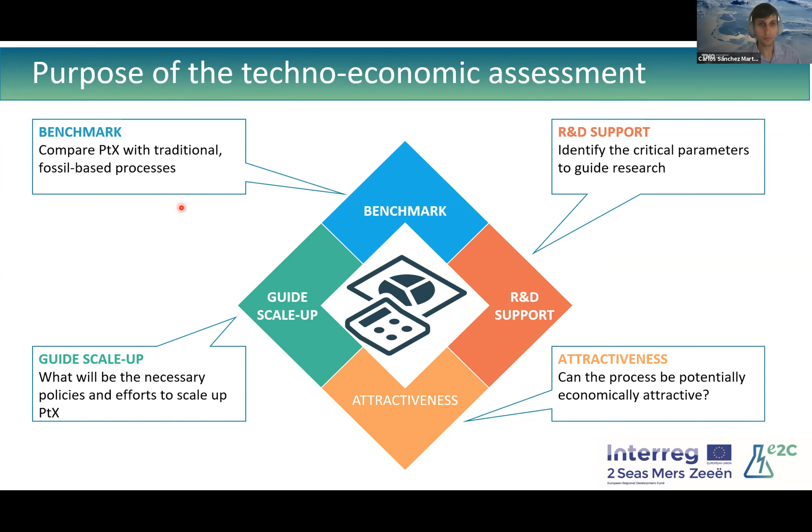So we can now move to the direct route for the formic acid production from CO2. So this direct route will be relying on this direct electrochemical reaction of carbon dioxide with water, along with electricity as the main input, to produce formic acid and oxygen. So oxygen is a byproduct from water oxidation happening at the anode of the electrolyzer.

So the main difference between these two approaches is that in the 3-compartment electrolyzer, we will produce formic acid in its direct form. And in the 2-compartment case, we will produce formate, which is the deprotonated anionic species of formic acid. So because of this, in the 2-compartment case, we will need to add a protonation step to produce the formic acid out of formate and then go to the purification section to produce the concentrated formic acid solution. So indeed, this will have an impact on the final process economics and the total production costs of formic acid in the 2-compartment system.

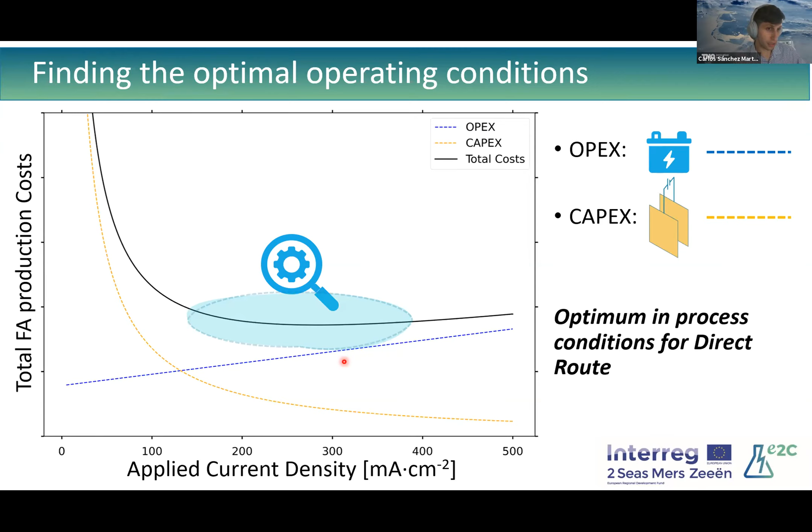So once we have chosen these optimal parameters, we can run sensitivity analysis on both the process parameters and the economic indicators. In the process parameters, we see that the Faradaic efficiency, which tells us how many electrons end up in our desired product from the total electron input, and the yield of the electrolyzer, which tells us the product loss during electrolysis, are the dominant cost factors. So these results can already flag the R&D researchers and departments to pay special attention to catalyst and electrode development to enhance the efficiencies, and to reactor and process development to minimize the formic acid losses in the electrolyzer and increase its yields as much as possible.

On the economic indicator side, we see that the annual production scale and the electricity price are the main cost factors. If you look at the annual production scale, for bigger plants and bigger processes, we can benefit from economy of scale effects and reduce CAPEX per unit of product. On the electricity price, it is a straightforward relationship with the cost, given that electricity is one of the main inputs for the electrolysis process in the direct route.

So the main message here from the sensitivity analysis would be that we must look at low electricity prices, for instance using excess renewable electricity, and also try to have high production capacities in the future Power-to-X plants.

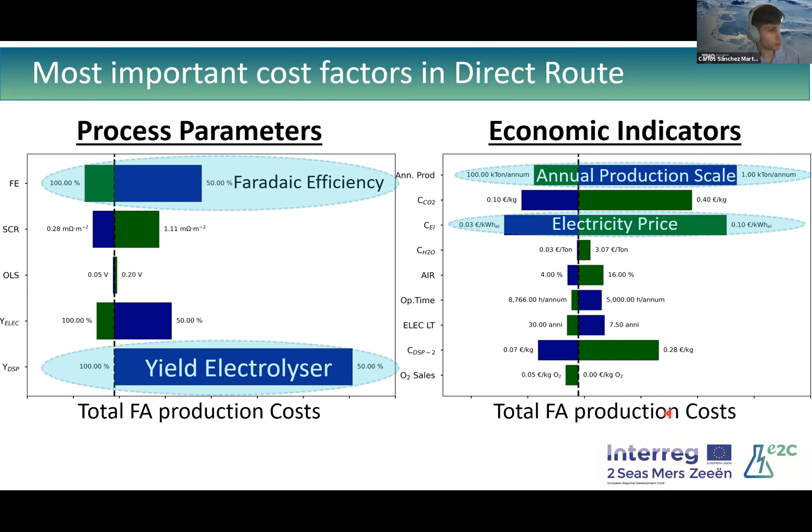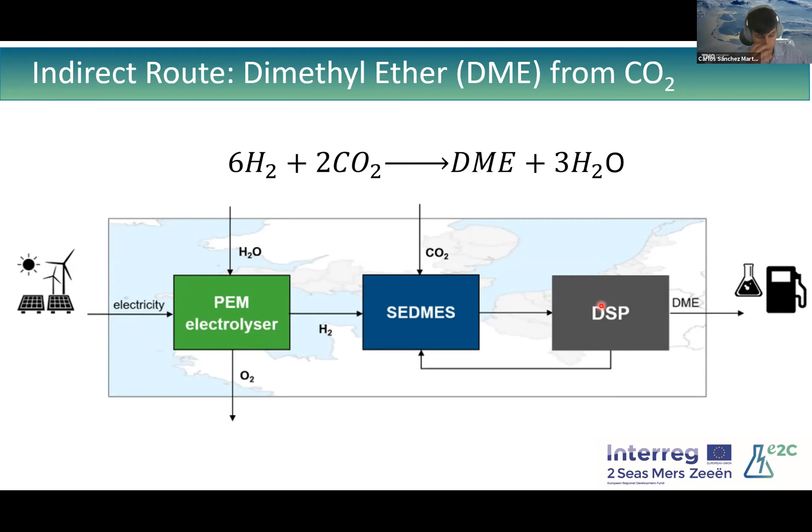This reaction takes place in the so-called SEDMES process, a proprietary technology being developed by TNO in our Petten branch. The DME solution produced will directly go to the separation process to achieve the fuel grade purity required for selling DME. SEDMES stands for Sorption Enhanced DME Synthesis.

In the traditional process, DME is produced through the 2-step methanol production and dehydration route. The particularity of SEDMES is that we can remove in situ the water that is produced, using adsorbent materials, and thus shift the reaction towards DME production. If you remember from the previous reaction, it was an equilibrium reaction in which we need to shift the equilibrium towards DME.

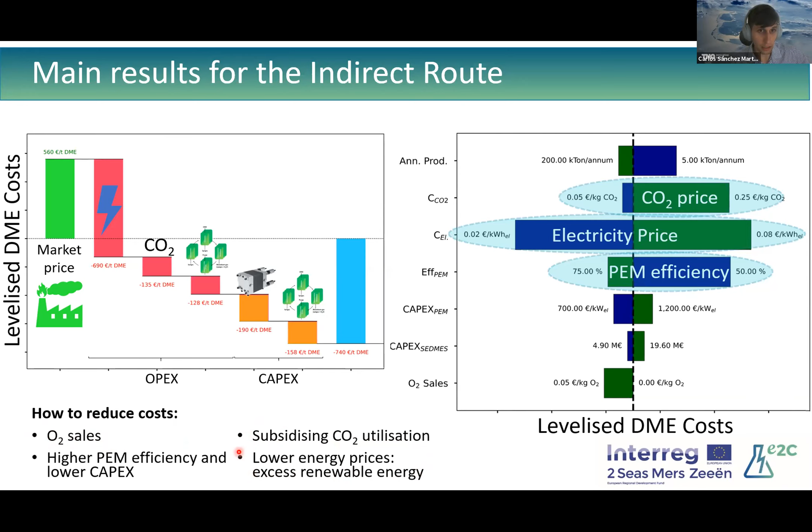So that will be the end of my presentation. Thank you very much.

Okay, thank you, Carlos. Good.